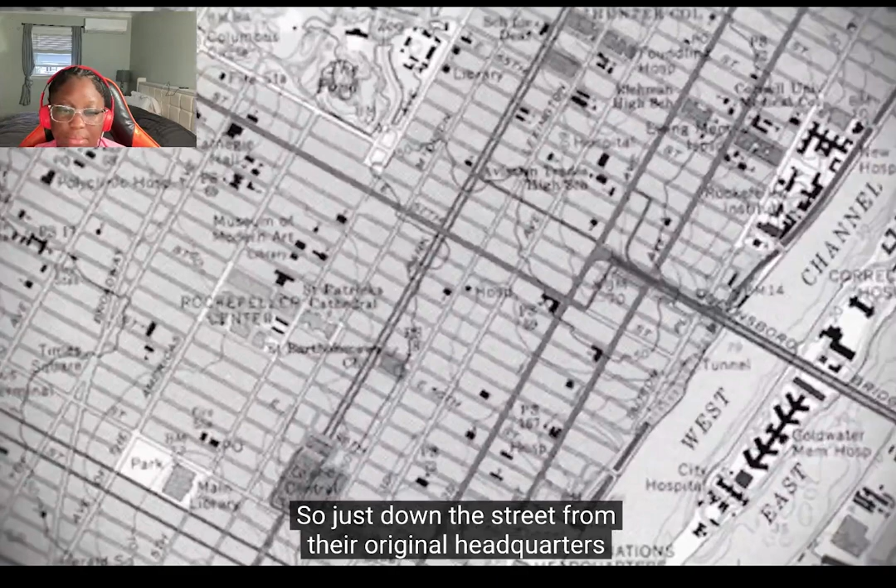So in the 1960s, the financial giant Citicorp was trying to build a new headquarters in Manhattan. Just down the street from their original headquarters was this entire city block, which was up for sale, well, everything except for this church, St. Peter's. Citicorp came to the pastor, Ralph Peterson, and asked, 'What's it going to take for you guys to leave?' And he came back and said, 'We're not leaving. Anything that Citicorp builds has to involve the church as part of it.'

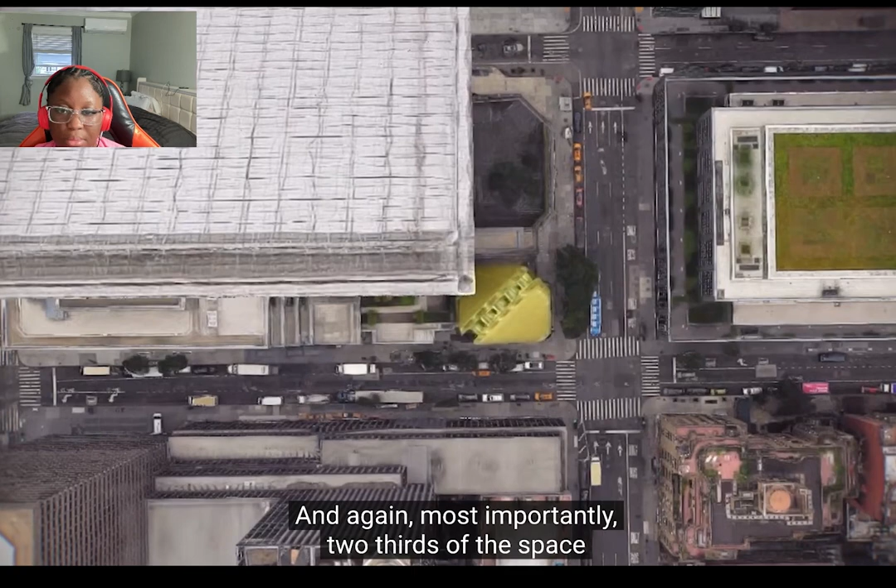What the pastor wanted was for the church to have its own separate identity. So eventually they agreed on two things. One was to replace this old crumbling Gothic church with a brand new one, which you see in front of you. And the second thing was that the church had to be physically distinct from the new tower—completely independent. Most importantly, two-thirds of the space above the church had to be free and clear, had to be open.

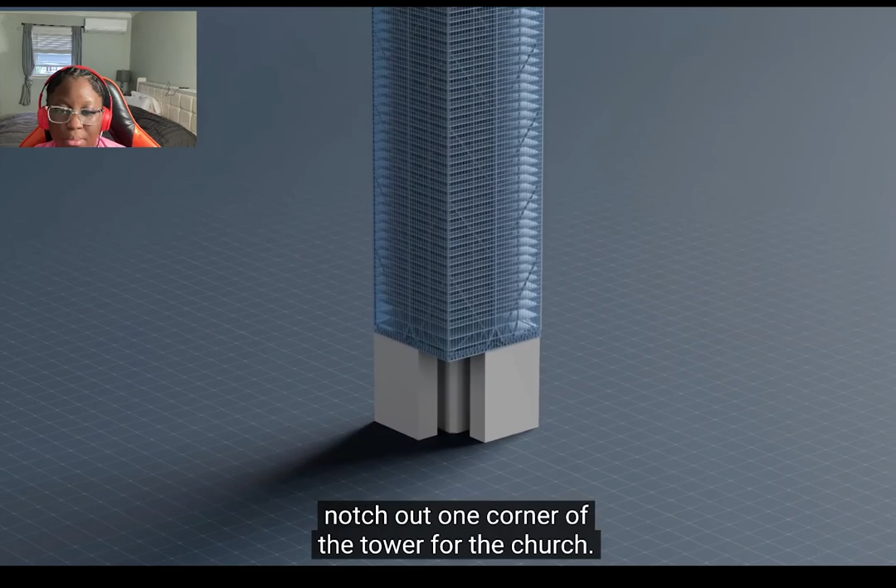Citicorp then hired architect Hugh Stubbins to design the tower and the church, and Bill LeMessurier as the structural engineer. Stubbins explained the constraints they faced: the church needed to be in the exact same spot, and they needed to build the tower around it. If they were to maximize the floor area, they would have to notch out one corner of the tower for the church.

LeMessurier agreed that could work, but why not notch 2, 3, or even all 4 corners, essentially constructing the skyscraper on stilts? So it's probably the first time in history that an engineer has come to an architect and said, 'Let's make our job harder for us.'

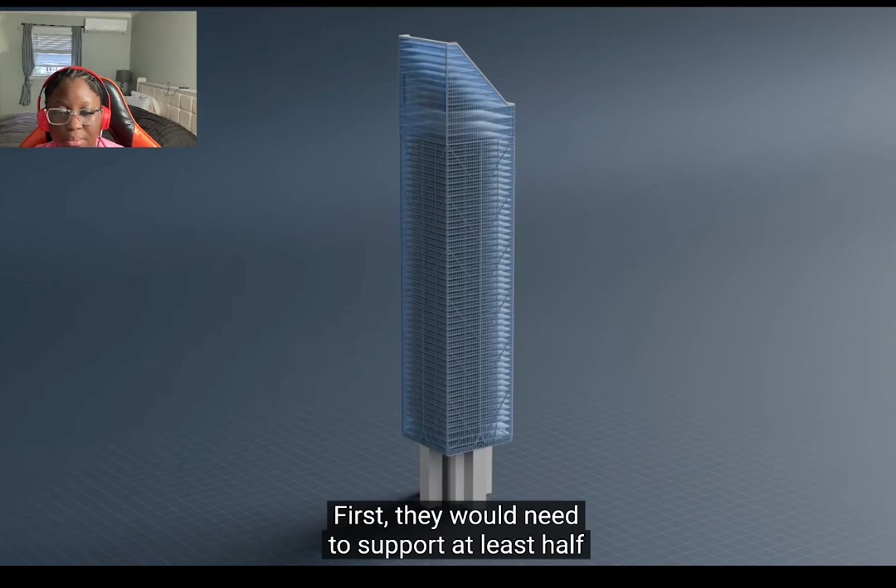The stilts would serve two main purposes. First, they would need to support at least half of the building's gravity load—the rest would be held up by a larger central column. Second, they would need to withstand the load due to high winds.

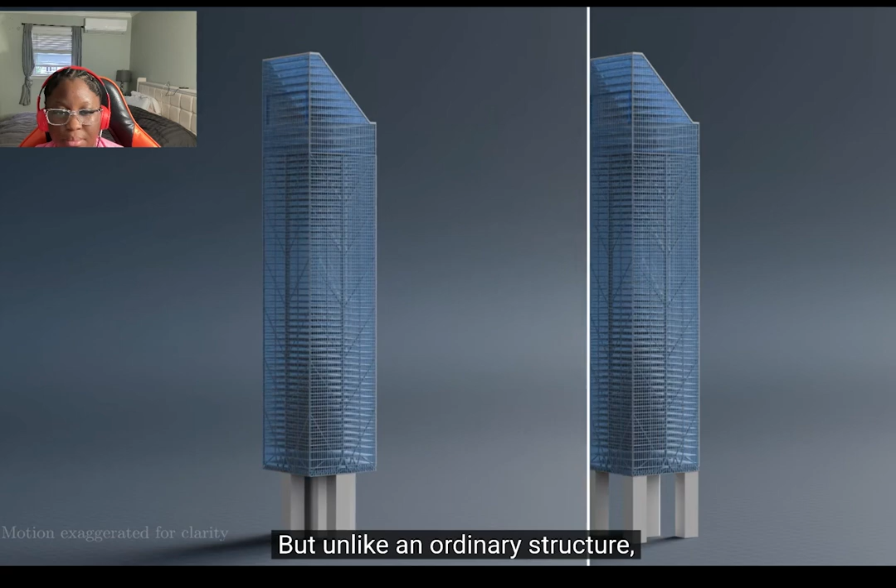But unlike an ordinary structure, the stilts wouldn't be at the corners—they would be at the center of each face. Imagine a chair, and instead of the columns or the supports on each corner of the chair, it's at the midpoint of each side. Obviously, it's not an ideal situation—it doesn't seem very stable. Exactly. So it created an engineering problem.

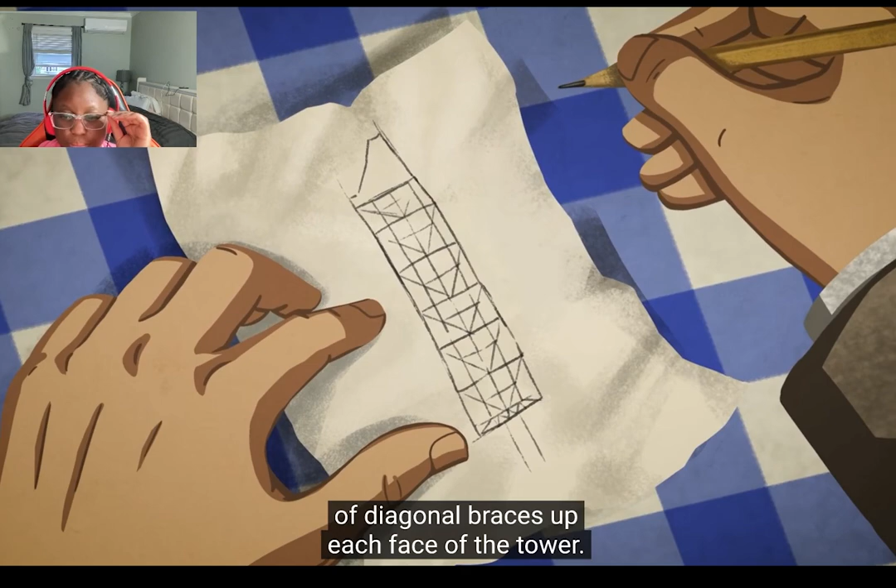As LeMessurier considered the problem, he suddenly had a flash of inspiration. He grabbed a napkin and sketched out an idea: he drew 6 layers of diagonal braces up each face of the tower. These chevrons would transfer the forces to the middle of each face and down to the stilts.

Now we have to see the gravity loads, right? But now here's the trick: the gravity loads are coming down the column. When they get to the brace, they need to find their way into the brace.

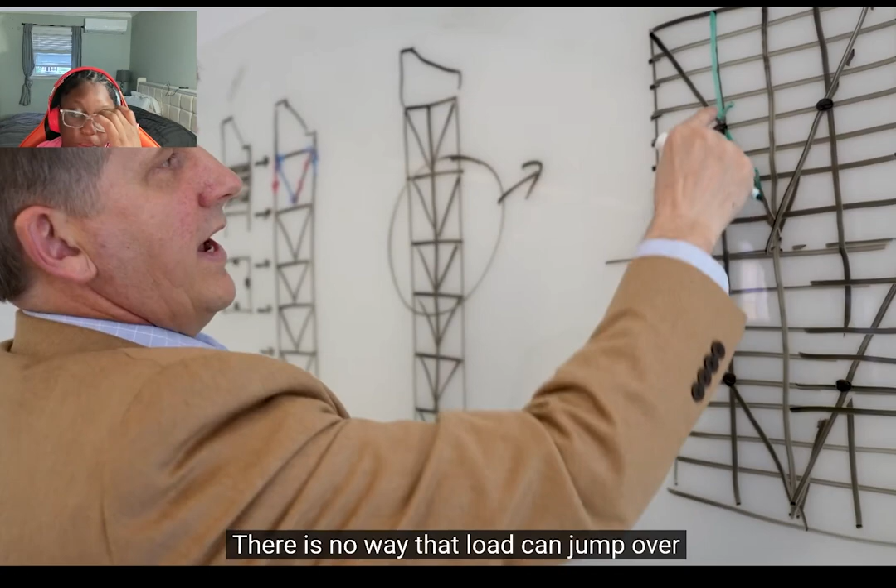So what you do is you take out that column right there. There is no way that load can jump over and go to that column. Now they're coming down into the braces. They get down to the bottom here, and now they continue to go down. You take that column out, and it has nowhere to go except into the brace.

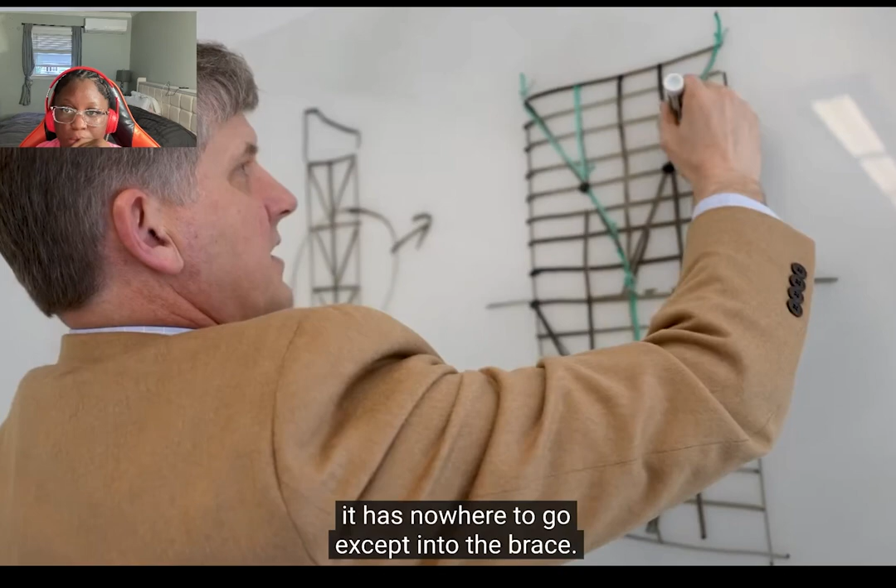By removing the columns at the top and middle of each chevron, every tier acted as a separate unit. They were only connected to the braces and through the central core. So every 8 stories, half of the gravity load would be forced through the chevrons to the mid-face columns, leading down to the stilts.

Can you tell me how big of a new idea was this?

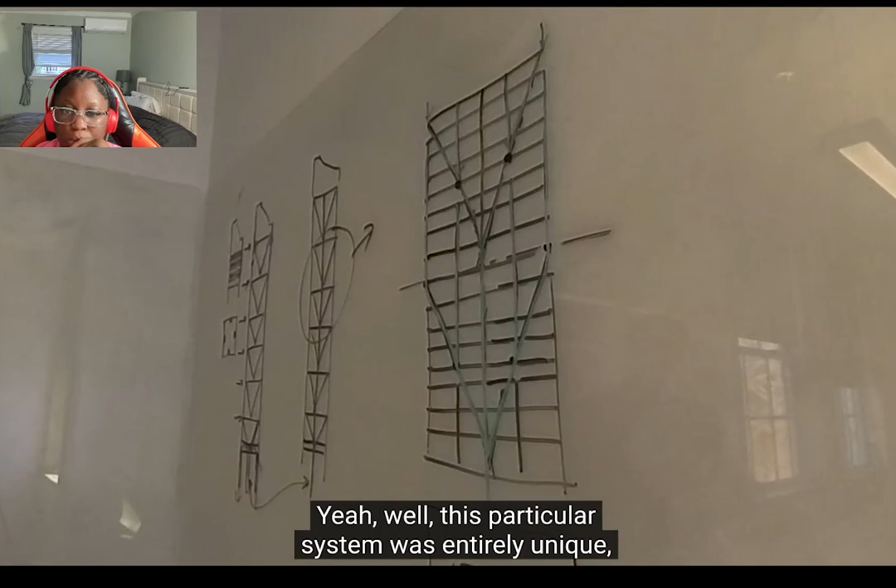Well, this particular system was entirely unique, driven by the placement of the columns, driven by the conditions of the building. Satisfied the chevrons could transfer the gravity load, Lemessurier turned his attention to the second problem, the wind.

When wind hits the left side of a normal building with corner columns, the entire frame deforms like this. So to reduce this deformation, we could strengthen these joints. But there's a better way.

One thing I like about making these reaction videos is I learn so much. So I'm learning and I'm also reacting, doing 2 things at once. A win is a win, baby. A win is a win.

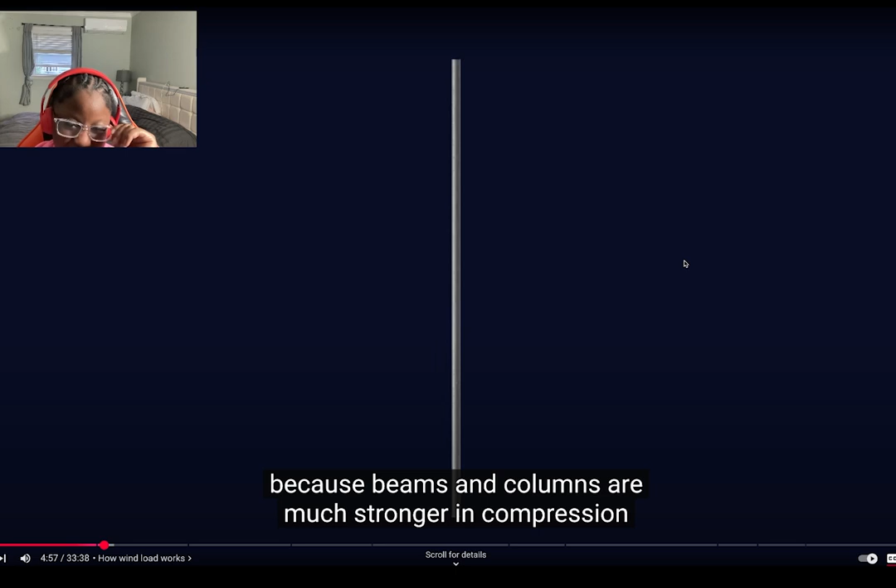Because beams and columns are much stronger in compression or tension than they are with bending loads.

So if we... because I didn't even know that. I didn't know that, and I wouldn't know that if I didn't watch the video.

A win is a win. A win is a win.

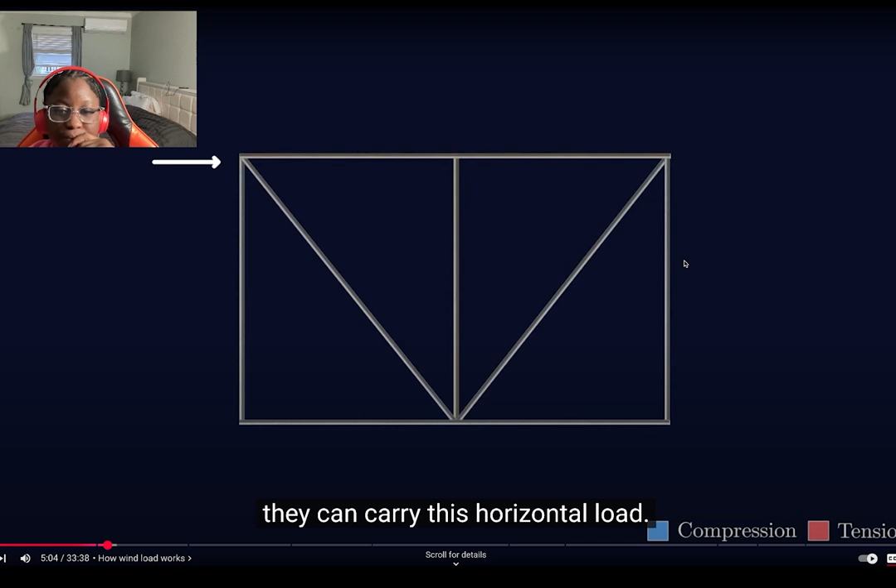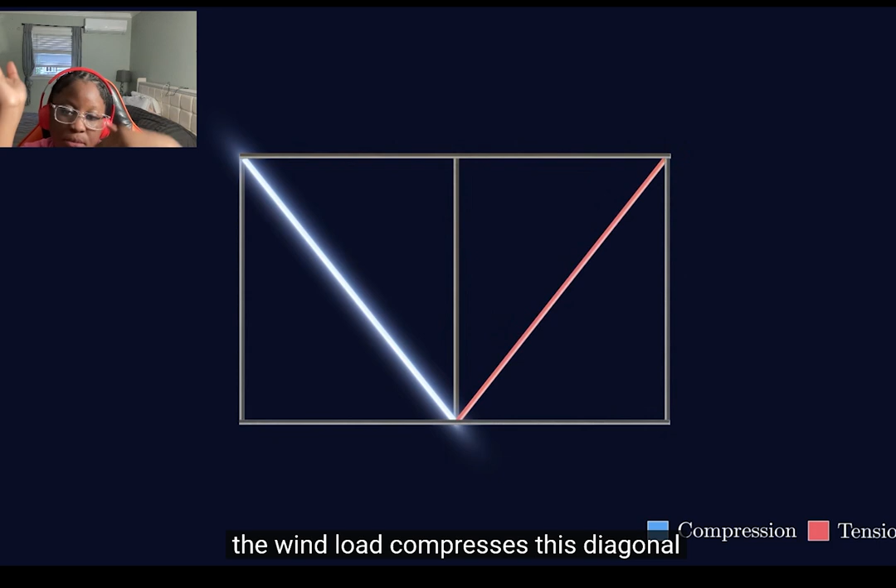Add diagonal bracing, and they can carry this horizontal load. The beams sort of act like springs, and when they're compressed, they push on the joints. When they're stretched, they pull inwards. With braces like these, the wind load compresses this diagonal and stretches this one. The left column pulls down in tension, and the right column pushes up in compression.

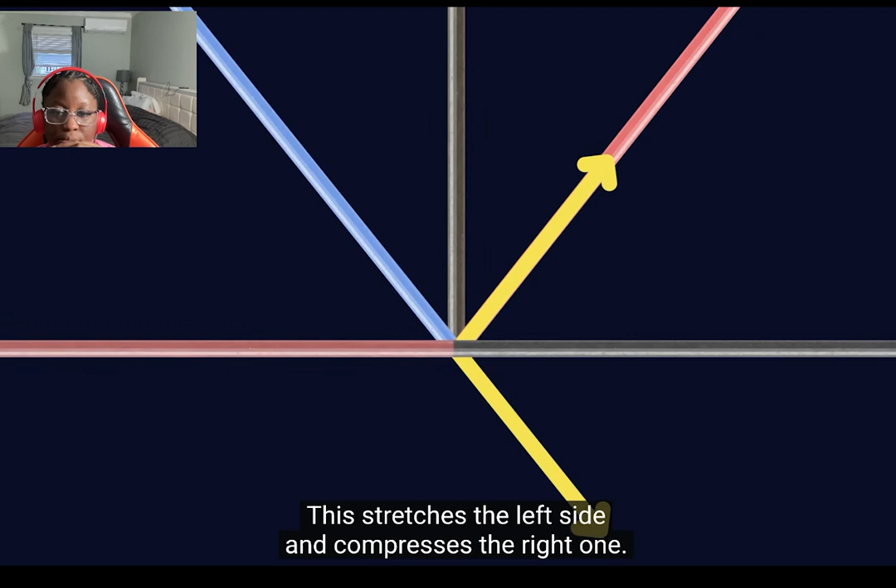Where the braces meet, they both push the bottom beam to the right. This stretches the left side and compresses the right one. But this floor is the top of the next chevron, so this lower section is carrying the force from the layer above it, and the normal wind load from the side.

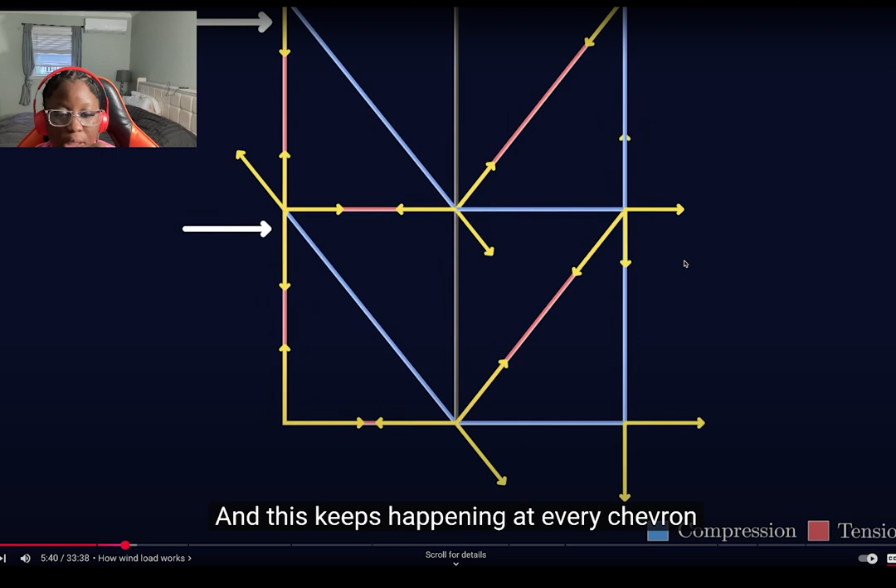That makes sense. This keeps happening at every chevron, so the wind load builds up as you go down the building.

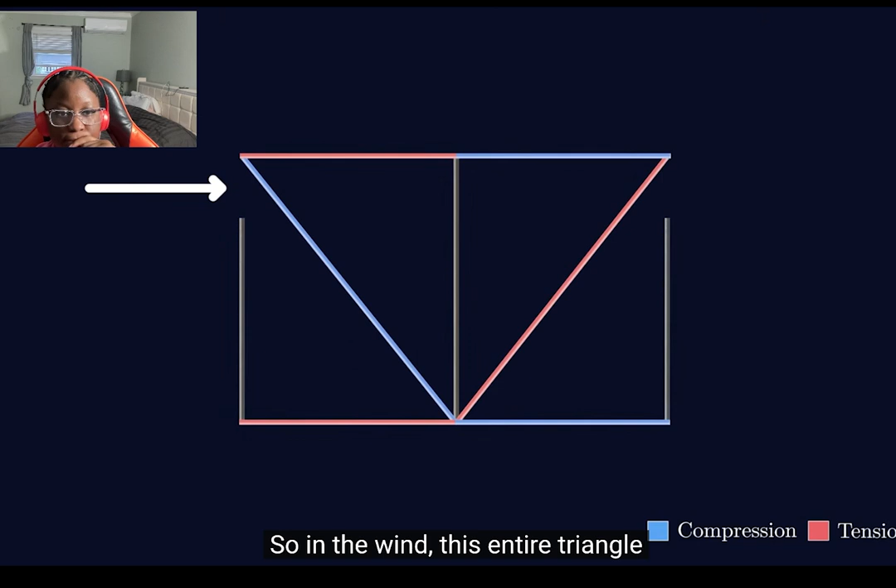But Citicorp can't have corner columns like this because of the gravity load. So in the wind, this entire triangle wants to rotate like this. And to prevent that from happening, this chevron pulls down by going into tension, and the far chevron pushes up in compression. Right, it needs to be in the center.

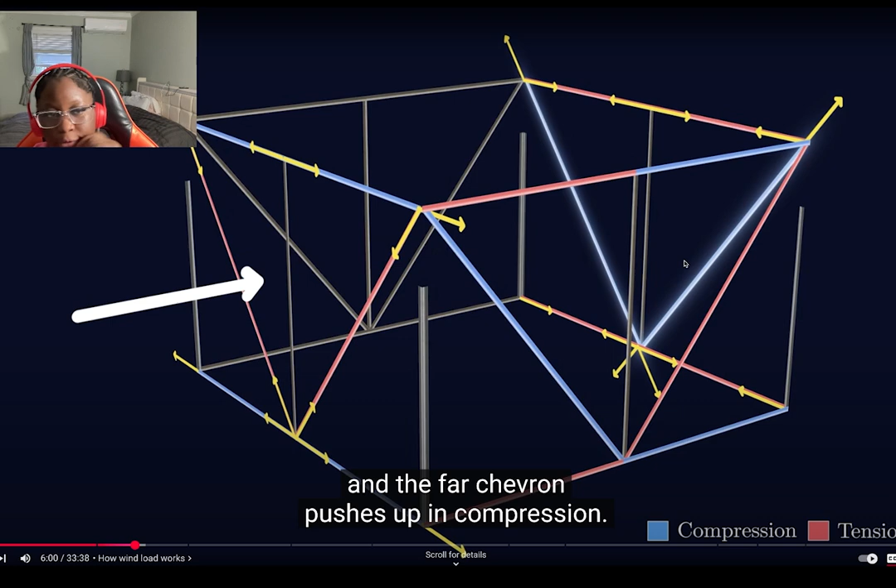So they got to figure out how can they put it in the center and keep it leveled and equal. The top and bottom beams are again forced into compression and tension. The wind load ends up wrapping around the entire building, so every chevron works to transfer the wind load to the section below.

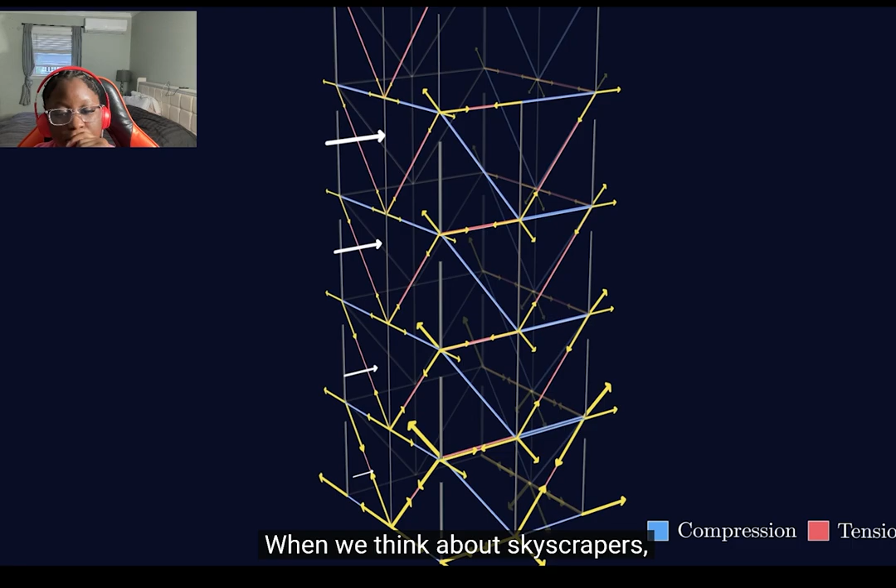When we think about skyscrapers, how big of a deal is wind? If we made a skyscraper here out of all these different things, you push with your phone, you get a certain amount of force. But then you push on my phone as well with a certain amount of force, and your phone is also pushing on my phone. That's the shear in the building, what we call the building shear.

It increases as you go down the building. At the 10th floor, you may have a smaller force than at the 60th floor, but the total force at the 10th floor is like carrying everything above it, so it's much bigger than what's going on at the 60th floor.

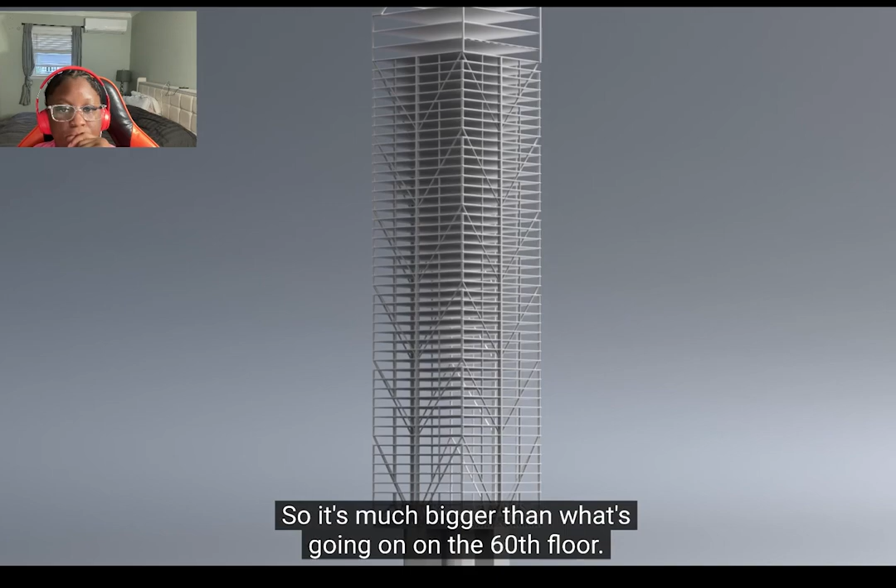So these chevrons were key to LeMessurier's design, but the braces were massive, almost 40 meters long end to end. So even if you could fabricate a steel brace that long, there would be no way to get it through Manhattan. So instead, it was sent in pieces to be welded together on site.

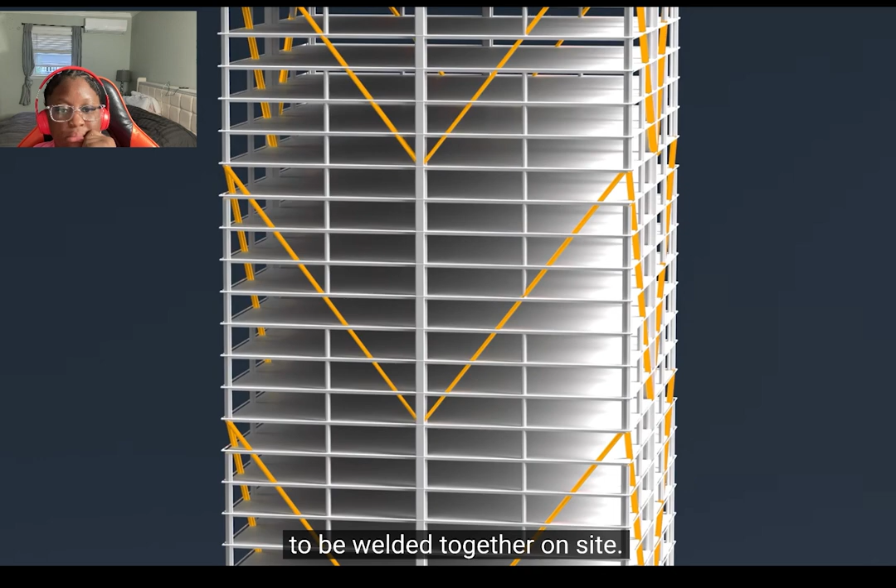The chevron bracing solved the wind and gravity load issues, but it also created a different problem.

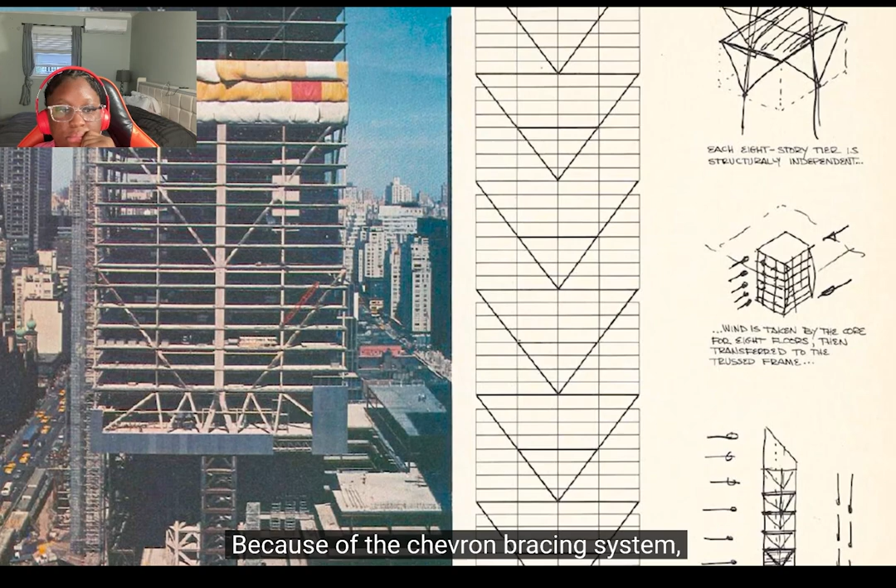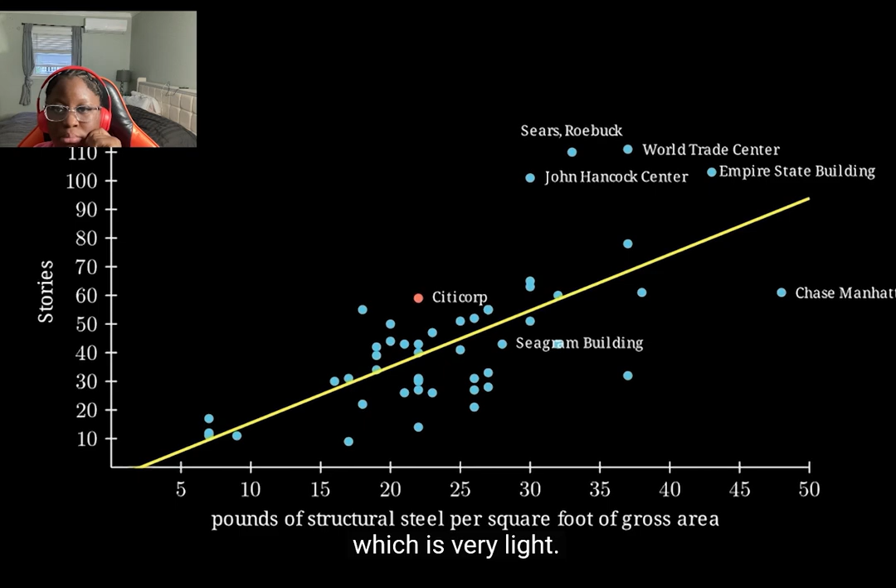Because of the chevron bracing system, they were able to save a lot of money and weight. It was a lighter construct than most other buildings in New York, about 22 pounds a square foot, which is very light. Unfortunately, that made the building swayable, it could move in the wind. That wasn't necessarily a structural problem, it could have just been uncomfortable for the patrons.

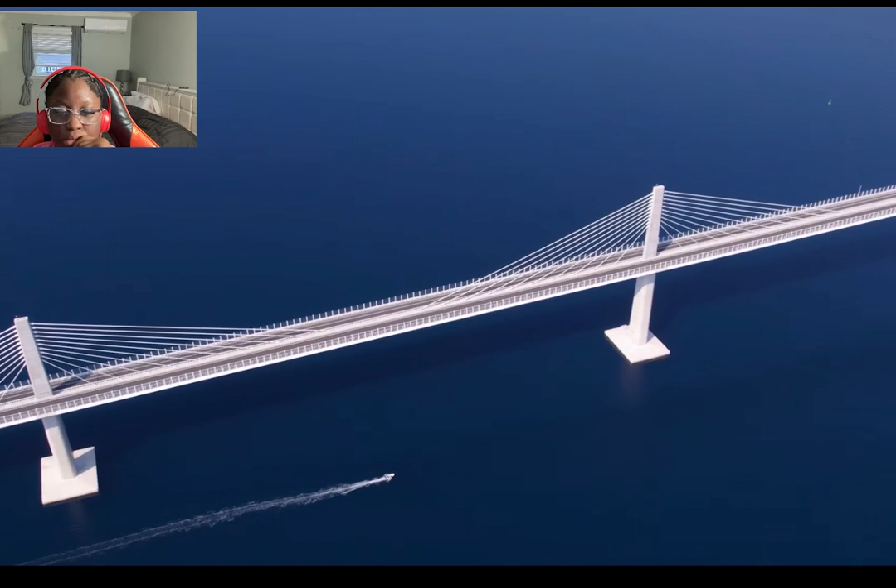One way to solve this was to add more structural steel and make it a lot stiffer. But the solution LeMessurier came up with was far more elegant. He adopted something that had been regularly used in bridges, power lines, and ships, but never before in a building: a tuned mass damper, or TMD.

So we're here at Stark Laboratories, and I'm not with Iron Man, but instead the Columbia Space Initiative, a student team here on campus who has helped us build this incredible tuned mass damper kind of system.

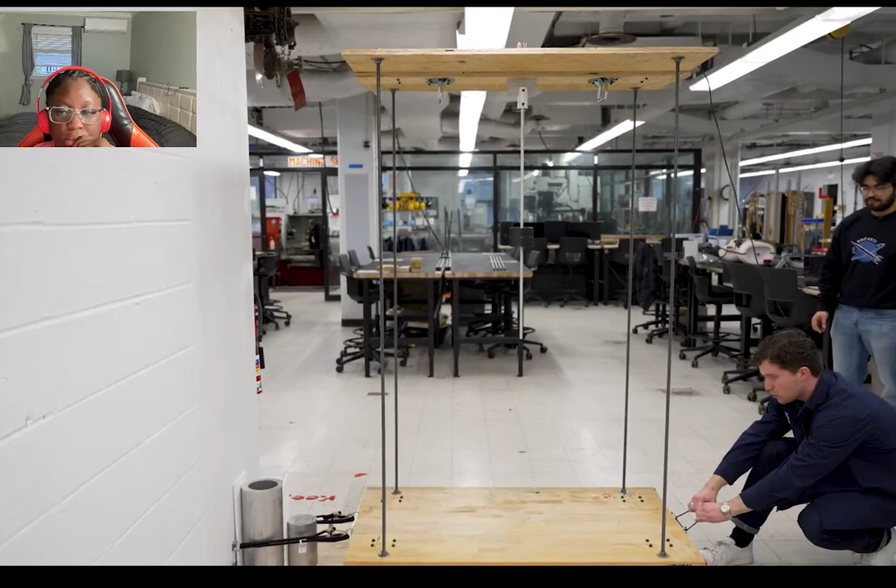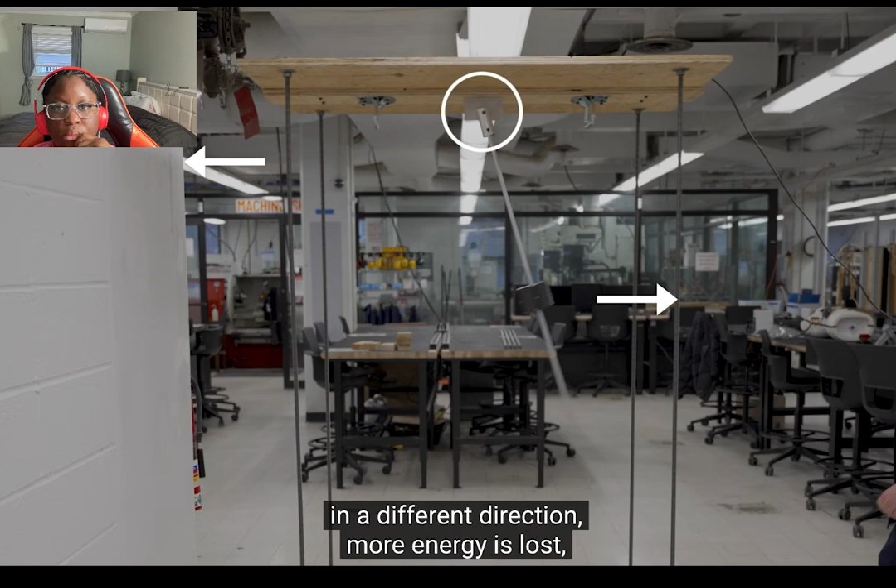We'll use this cart to represent a building. By pulling it back and releasing it, we can excite its resonant frequency. Then we'll put on a little pendulum, an aluminum rod, with a mass at the bottom. As the building sways, it transfers some of its kinetic energy to the pendulum, which starts to swing. Some of its energy is dissipated through friction at the hinge. The pendulum and the building oscillate out of phase from each other, so every time the building pulls the pendulum in a different direction, more energy is lost, significantly damping the sway of the tower.

But this system needs to be carefully tuned so it has the same frequency as the building itself and the right amount of friction. First, the mass needs to be at least 1 to 5% of the building's weight to be effective, and we tune the frequency of the TMD by adjusting the length of the pendulum.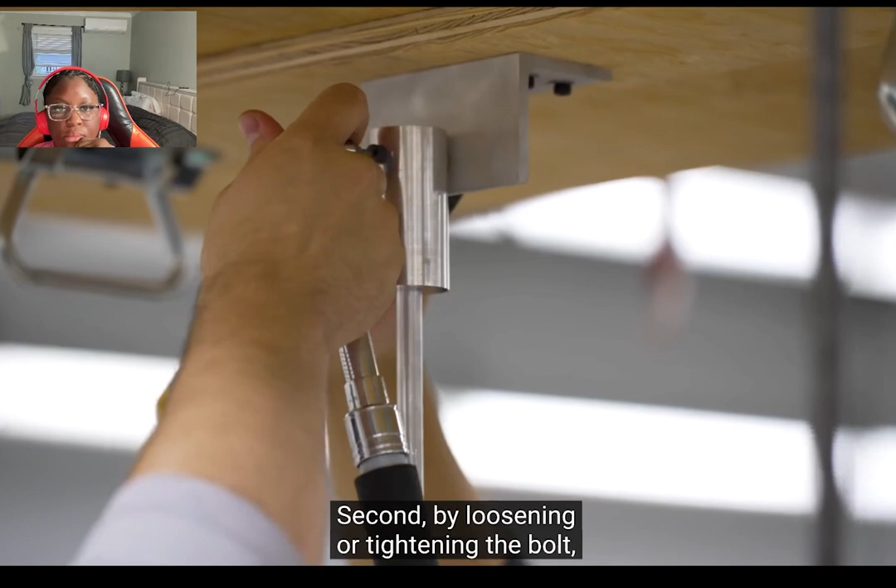I assume engineers do math around this thing, but we're just doing it by feel. By loosening or tightening the bolt, we can tune the amount of damping. We need to dissipate more energy from friction at the hinge to stop the swaying faster, so we just tighten this top bolt to add a little bit more resistance, and we'll see if we can dampen it further.

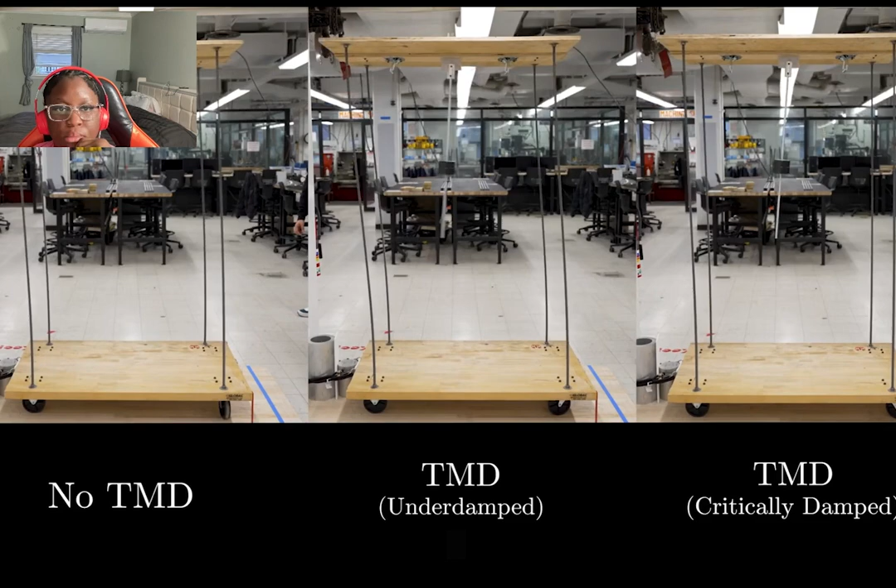Ooh, much different, yeah. That looked great. That was so quick. It is cool when an experiment works.

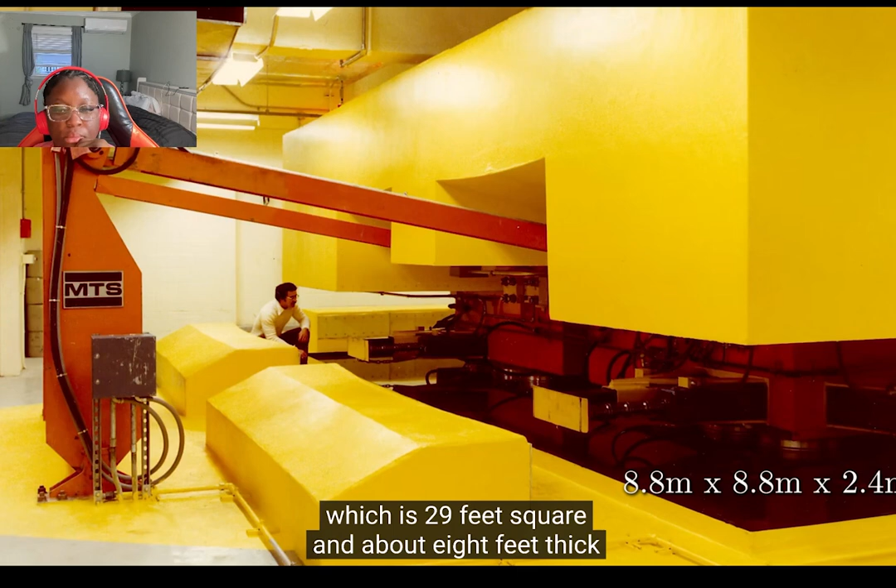It does not always happen. There are many different types of TMDs, like pendulums, liquid columns, and a large mass on springs. LeMessurier used this last one in Citicorp. What you see is a mass of concrete, which is 29 feet square and about 8 feet thick.

Making a building is a lot of work. There's a lot of unspoken work that goes into making a building, and I did not know this until watching this. You know what I'm saying? It's not just like having an idea and putting it down, drawing it on a piece of paper. The constructing of it is really crazy to me, and this is the reason why I think architects are an important part of society. Yeah, it is an important part of society.

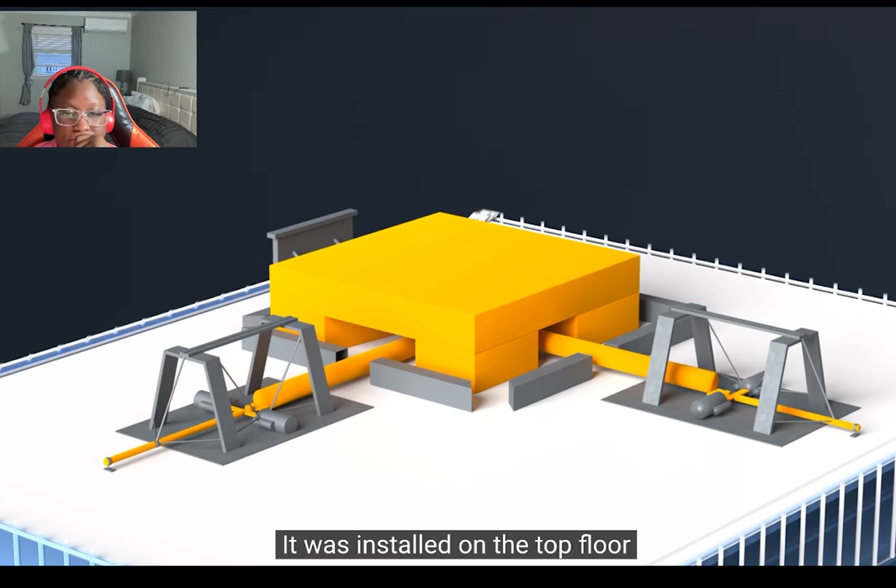Yeah, this is cool, thick and weighs 400 tons. It was installed on the top floor, and it's affectionately known as that great block of cheese. As Citicorp sways to one side, the block starts to move in the same direction. Some energy is dissipated through separate viscous dampers. Citicorp's oscillations are damped through those energy losses as the block oscillates out of phase to the building's motion. LeMessurier expected the damper to reduce the amplitude of swaying by roughly 50%, and he saved around $4 million by not needing an additional 2,800 tons of structural steel.

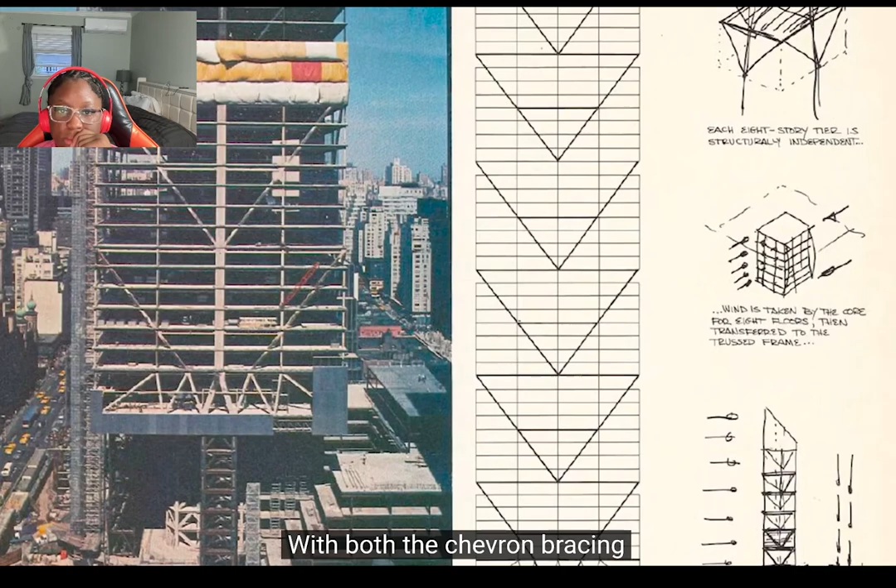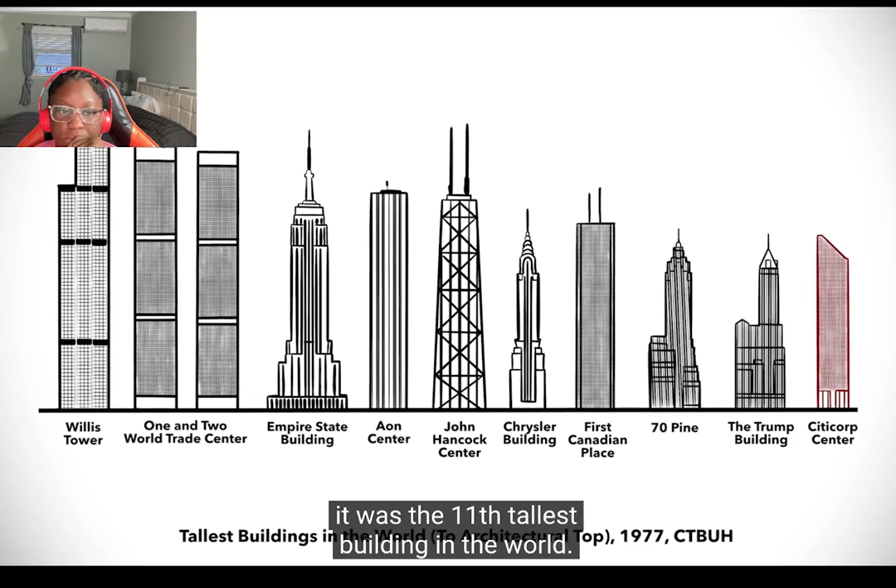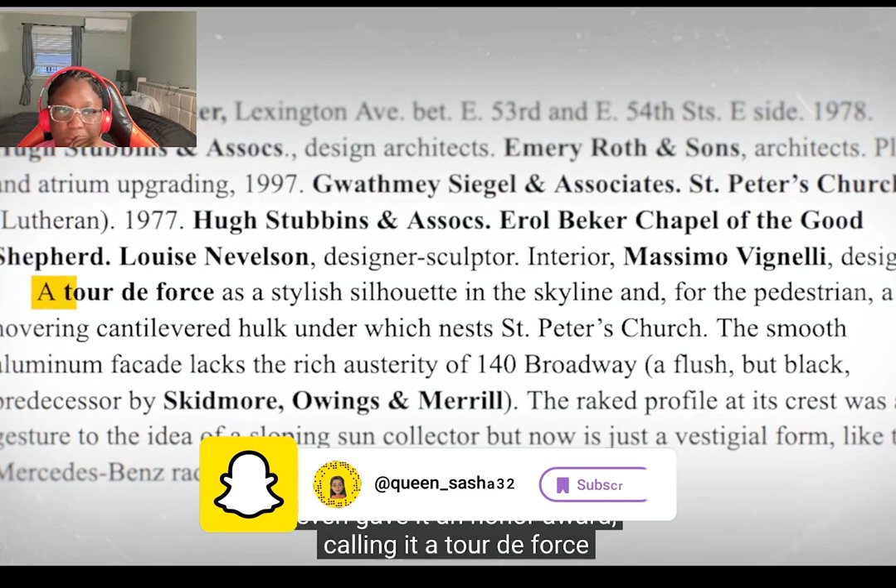With both the chevron bracing to channel forces to the stilts and the tuned mass damper to reduce sway, LeMessurier was convinced the building was structurally sound. On Citicorp Center's opening day in 1977, it was the 11th tallest building in the world. It was described by the press as an acrobatic act of architecture. Later, the American Institute of Architects even gave it an honor award, calling it a tour de force as a stylish silhouette in the skyline, and for the pedestrian, a hovering cantilevered hulk. If only they knew what's about to happen.

If only they knew what was about to happen to this building. So then, it's going swimmingly for years, right? Well, it's going swimmingly for about a year.

But the first hint of trouble came in May 1978. LeMessurier was talking with another client about welding similar chevron braces. The architect and steel fabricator said, tell me, how did those welded braces work out? Seems like overkill, they thought. LeMessurier says, yeah, they were fine. Let me call my guys in New York and I'll check. So he put the call into his office in New York, and they say, oh Bill, didn't you know?

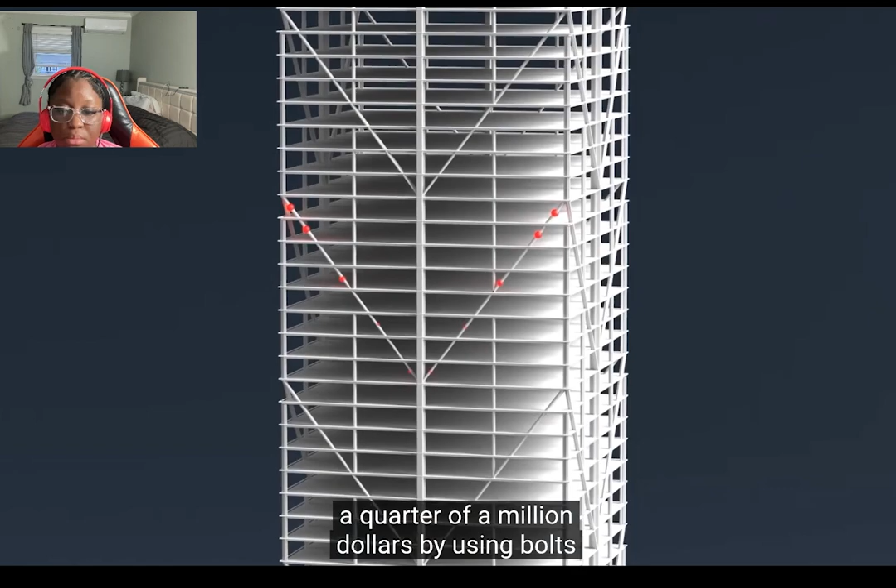We bolted those connections. The contractor had suggested saving $250,000 by using bolts to attach the braces instead of welds, and LeMessurier's firm had agreed.

There is nothing that says a bolt is inherently worse or better than a weld. You use them in different circumstances for different reasons. But it's a little surprising to find out. I thought the connections in this tour de force, one-of-a-kind skyscraper, that's on the cutting edge of structural engineering, was connected one way, but apparently it's connected another way.

But if the braces are going like this, where are they going to go? You only need the weld when the braces are going like this. Since the gravity load was always compressing the braces, some of the chevrons only went into tension under very high winds, and even then, it wasn't a lot of tension. LeMessurier trusted that his team did the right calculations, and the substitution was fine, logical even.

But around a month later, LeMessurier got a phone call from a student who wanted to ask some questions about the Citicorp Center. His teacher had said that engineer didn't know what he's doing, and nobody should put the columns in the middle, they should put them in the corners. That's silly. And I told the student, I said, well, your professor's full of it. He doesn't understand the problem we had to solve.

LeMessurier went through the calculations with the student to reassure him the stilts were in the right place. But the interesting thing is in that moment, he's thinking about wind loads from all directions. Late spring, early summer of 1978, Bill LeMessurier is working on the Back Bay Hilton Hotel that in plan forms a triangle, not a rectangle. Now you got a triangle, what's your orthogonal direction? You just have to give up and say, we're going to analyze it from every direction.

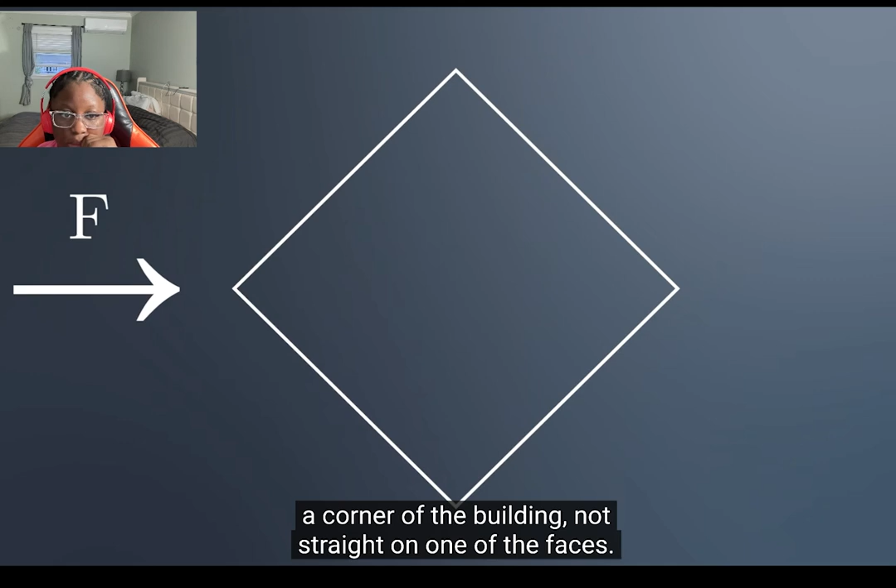He said, you know what? I've been getting all these calls from all these people. I'm going to sit down and explain this thing. He decided to double check what happens to the building if wind is hitting a corner of the building, not straight on one of the faces. These are also known as quartering winds.

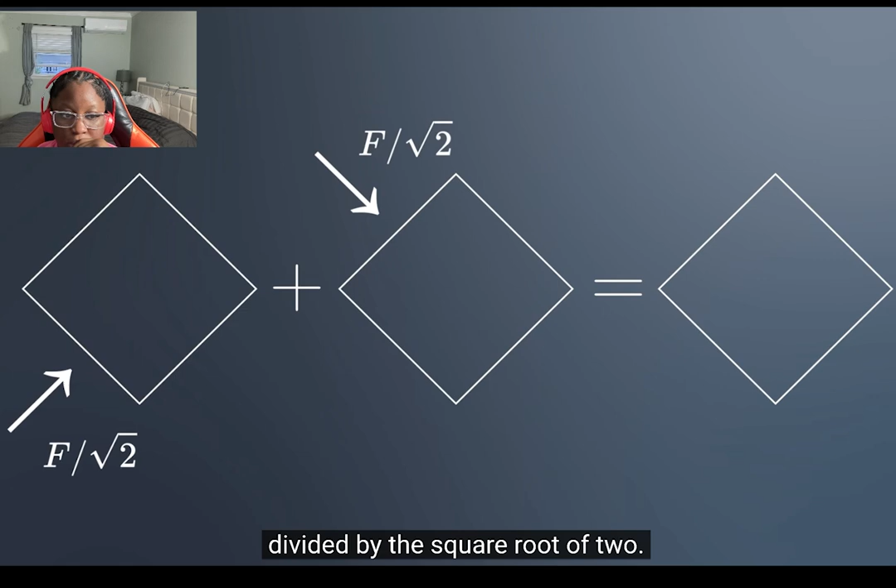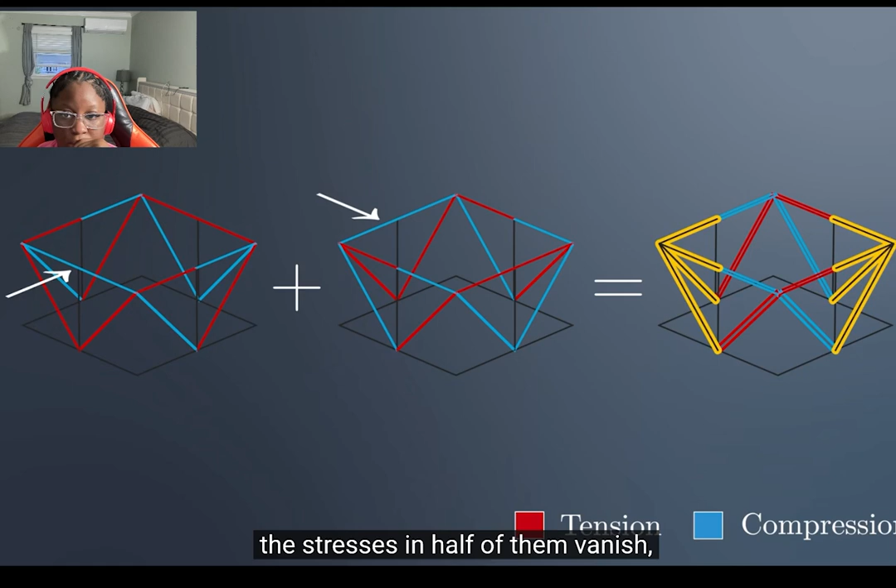So he split the wind into its perpendicular components, so the west side and north side are hit by the force divided by the square root of 2. He computed the forces for each, as we did before, and summed up the result. But then he noticed something strange. And now we look at the diagonals. The stresses in half of them vanish, and in the other half, double. Since the force on each side was F over the square root of 2, these beams get double that.

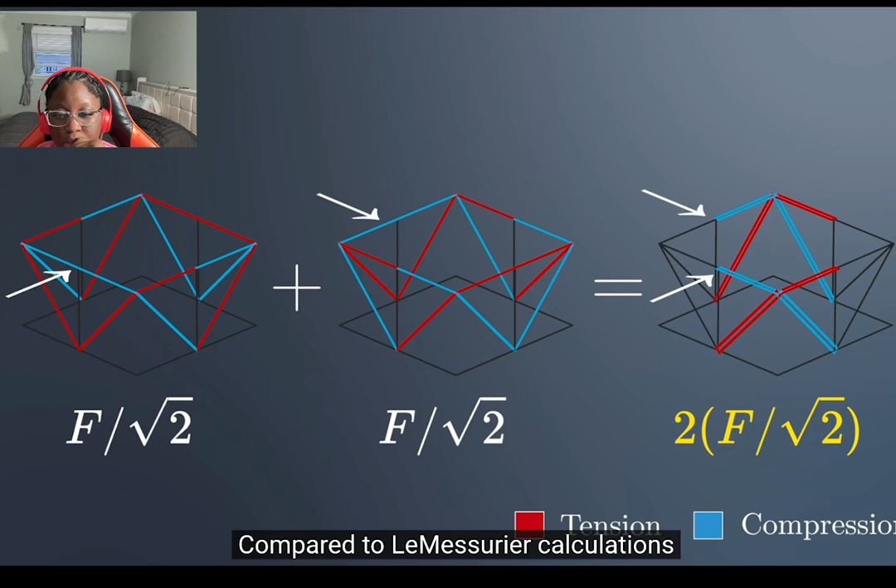Compared to LeMessurier's calculations for the perpendicular wind load, the forces here were 40% higher. So 1.4 by itself is not enough to wreak havoc. Okay, it may be, but it may not be. So then the question is, well, what happens?

This increase in forces wouldn't have mattered in the original design since the chevrons were fully welded together. But that wasn't the case anymore. LeMessurier remembered his earlier phone call. The welds holding the chevrons together were swapped for bolts.

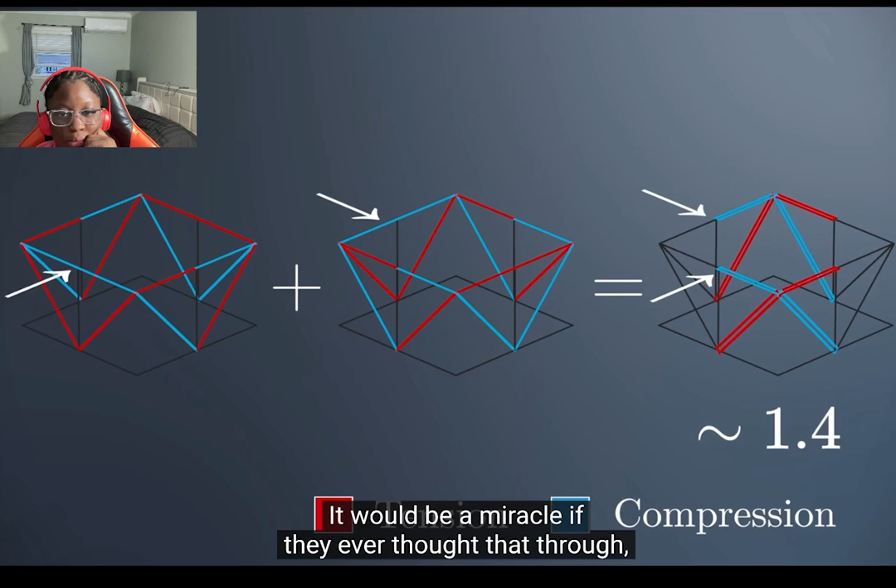How did his team calculate the number of bolts per joint? That's a good question. Please answer that question because I was thinking that too. Did they consider quartering winds? It would be a miracle if they ever thought that through, to think about the diagonal wind. It just wasn't in the nature of anybody.

So I had a bit of a worry. I didn't panic right away, but I decided to go down to New York to my office. LeMessurier requested the building diagrams and pored over all of the connections.

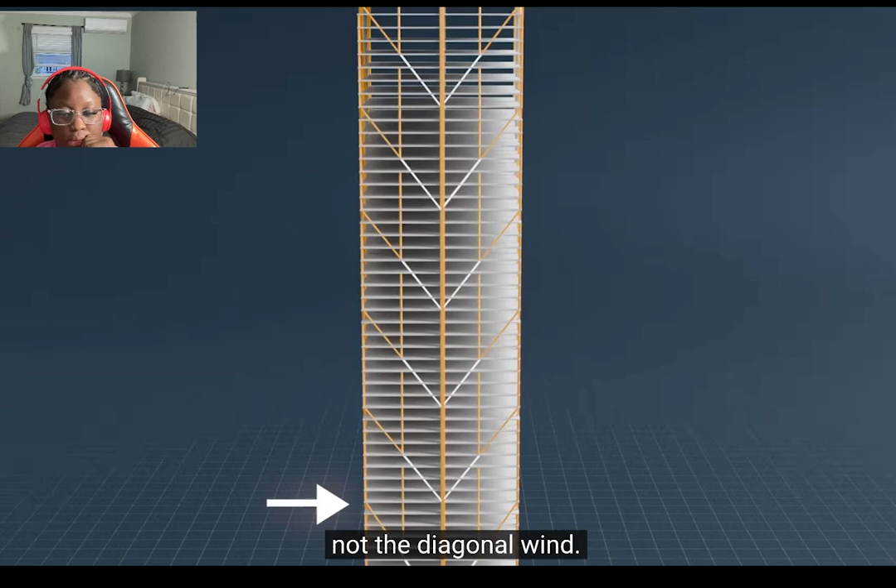He looked at how his firm calculated the number of bolts. There was no question they had taken the straight-on wind, not the diagonal wind. Although wind speed is highest at the top of the tower, the wind shear builds up as you go lower.

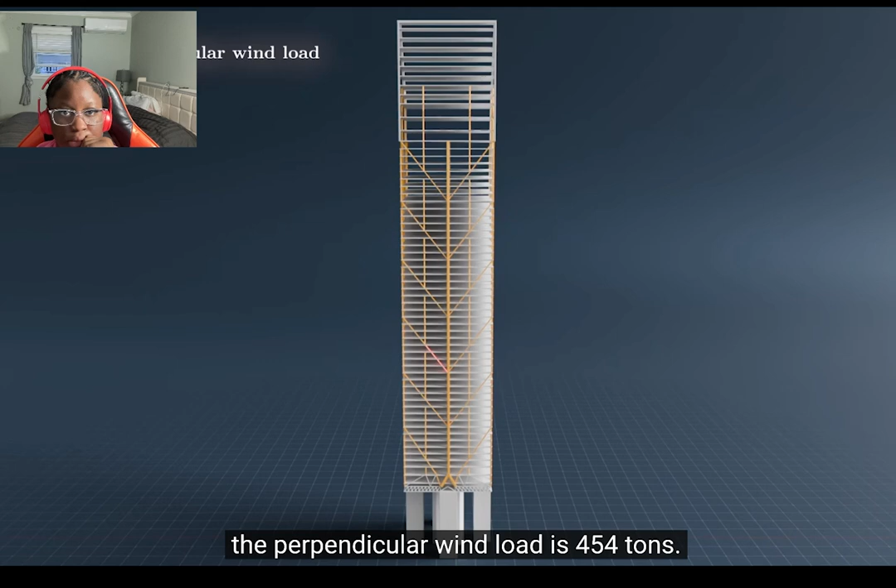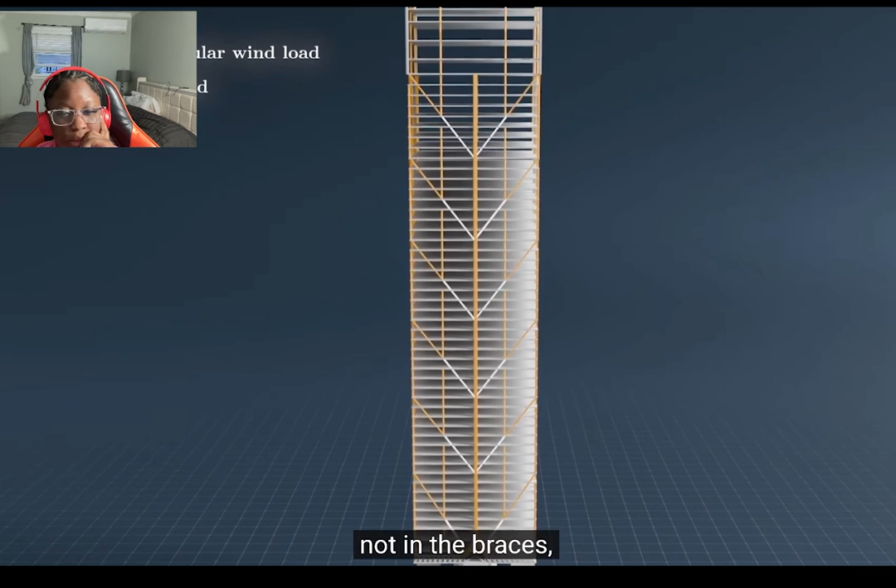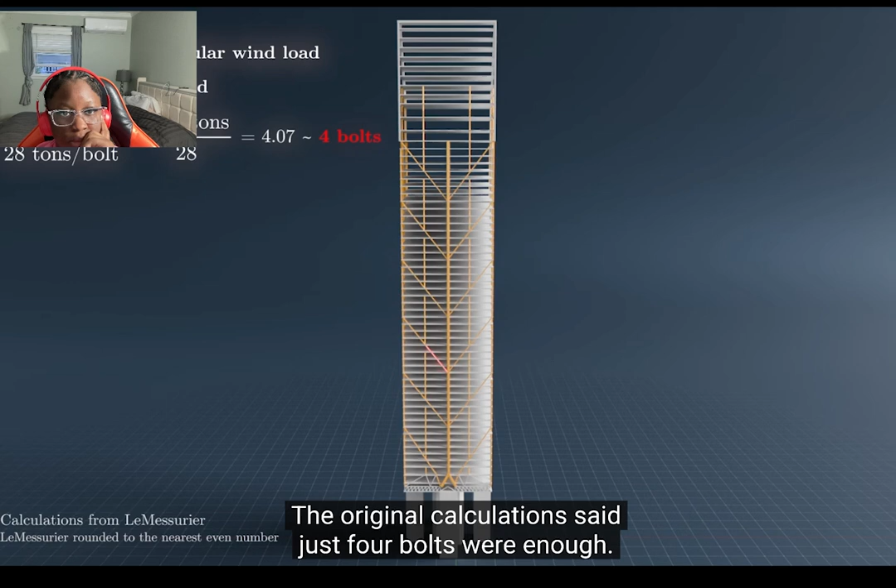Looking at this brace around halfway down the tower, the perpendicular wind load is 454 tons. Because of the skipped columns, all of these braces carry the same gravity load, just 340 tons, from the 8 stories above. The gravity load builds up in the center column, not in the braces, which means there are 114 tons of tension in this brace. If each bolt can withstand around 28 tons, that would require 4 bolts. The original calculations said just 4 bolts were enough, so that was all they used.

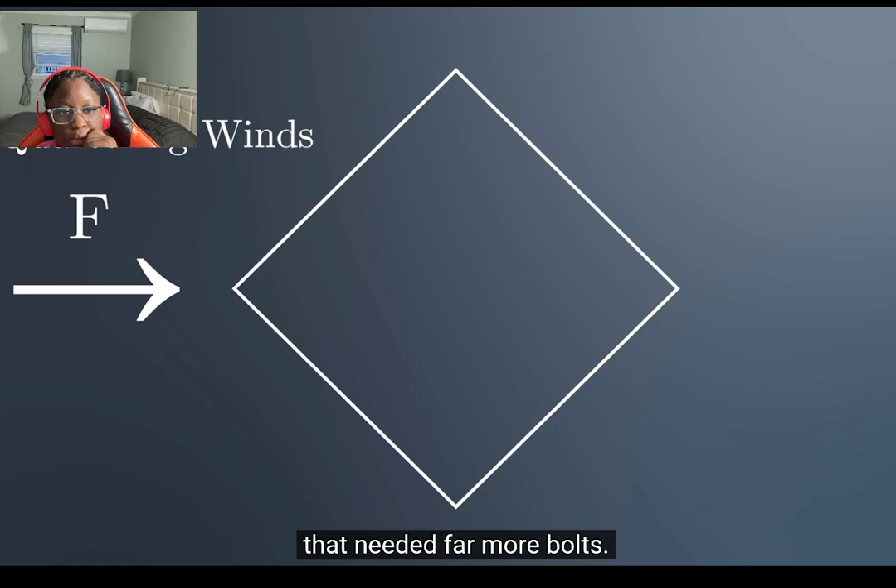But when he added quartering winds, LeMessurier's calculations showed there were some braces that needed far more bolts. At this particular part of the building, which I can show you on my calculations, is right about here. And Bill LeMessurier talked about the 30th floor. I always wondered, why was it the 30th floor?

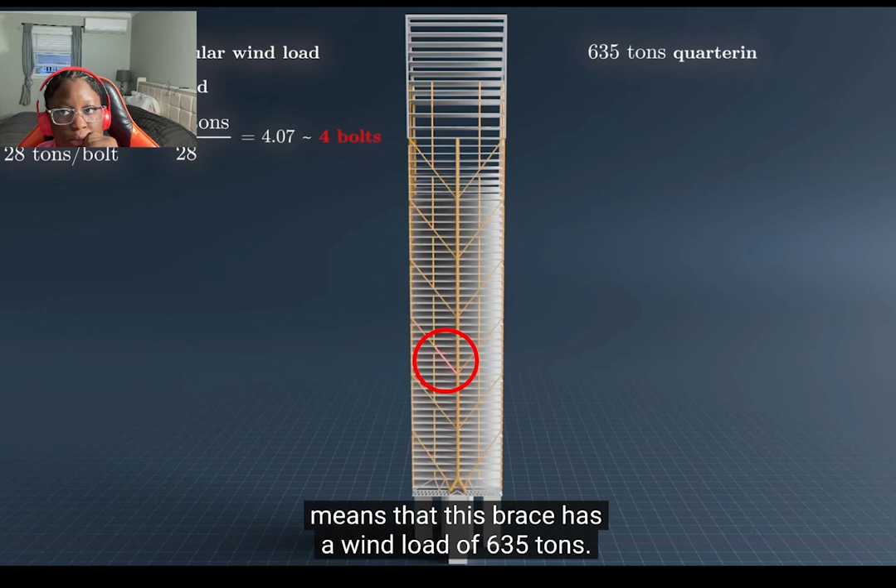The 40% increase from quartering winds means that this brace has a wind load of 635 tons. The tension in the brace is now 295 tons, over double the original calculation. So these braces actually need around 10 bolts, not 4.

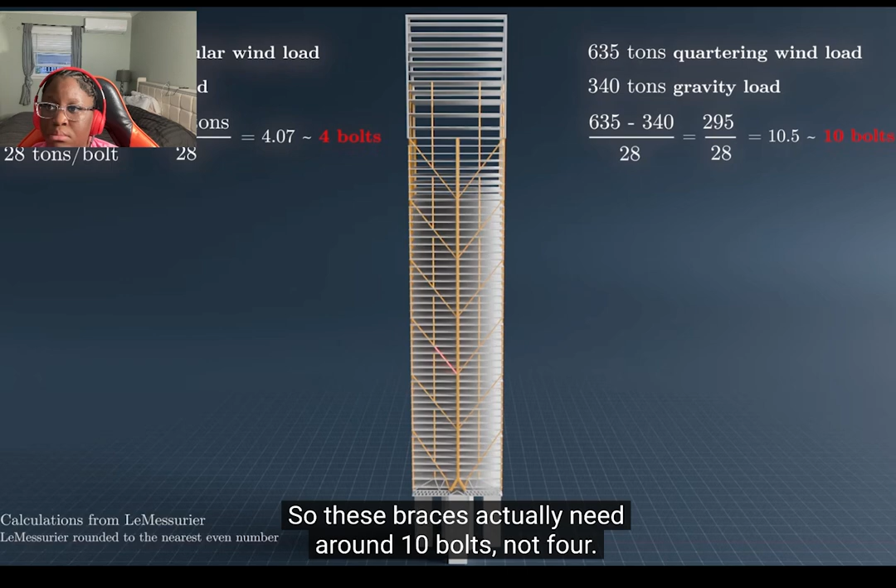But then it turned out they had done something. Damn.

So they need 6 more bolts. I know he had to be stressing. I know he had to be stressing about this.

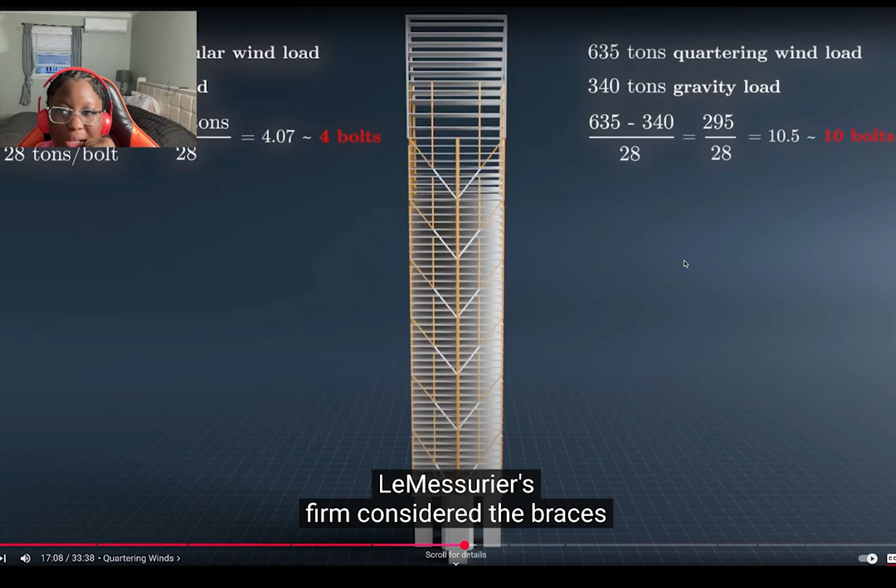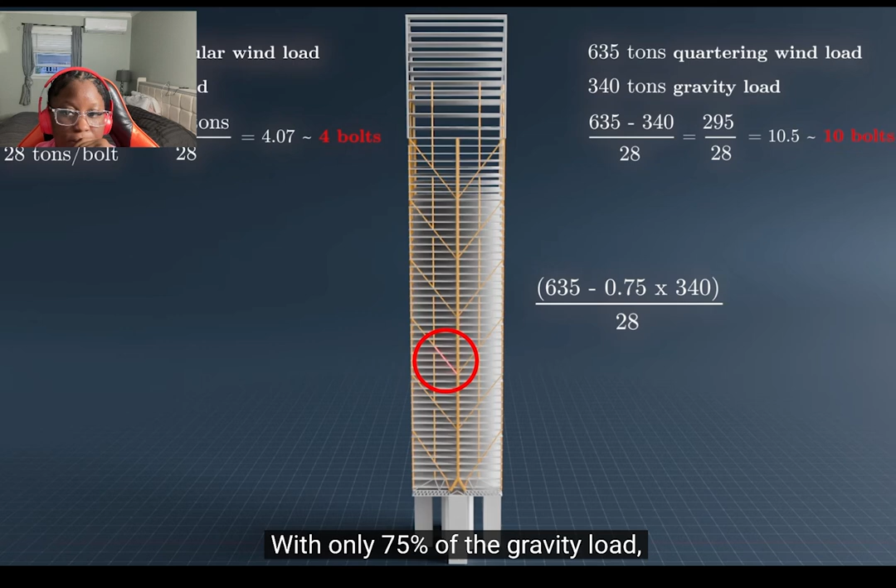LeMessurier's firm considered the braces to be minor structural elements. They didn't use the right factor of safety to calculate the number of bolts. They should have overestimated the tension in the brace by underestimating the gravity load. With only 75% of the gravity load, the tension in the brace is now 380 tons. So they really needed 14 bolts, but they used only 4.

I said, this thing is in real trouble. Imagine what Bill LeMessurier was thinking at that moment. You see that number and you're like, oh my God, this is serious. It's really serious. LeMessurier was starting to panic.

He didn't want to rush to conclusions, so he flew to Canada to check his calculations with Alan Davenport at the Boundary Layer Wind Tunnel. After running more tests, they found that it was even worse than LeMessurier thought.

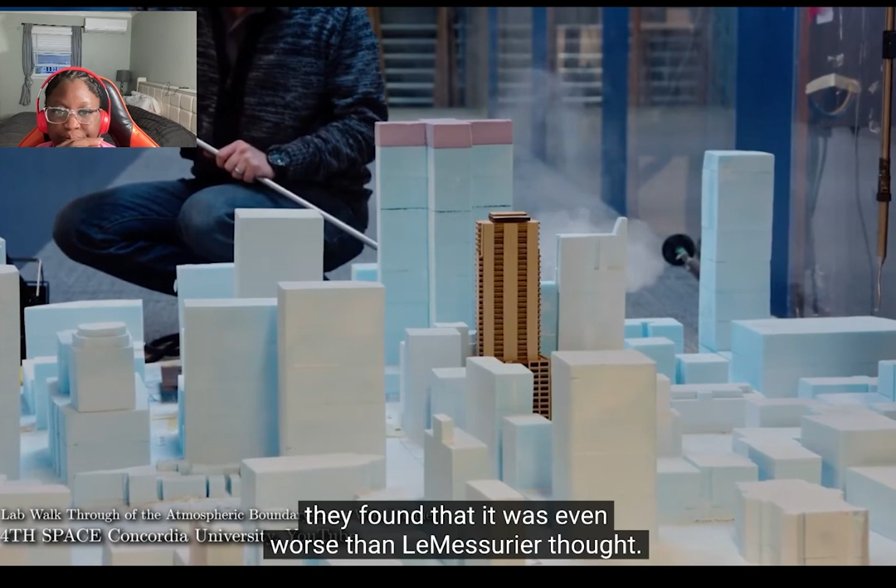That's a job? A wind tunnel? So he's a wind tunneler? Wow. America has so many jobs out there. You just gotta do your research.

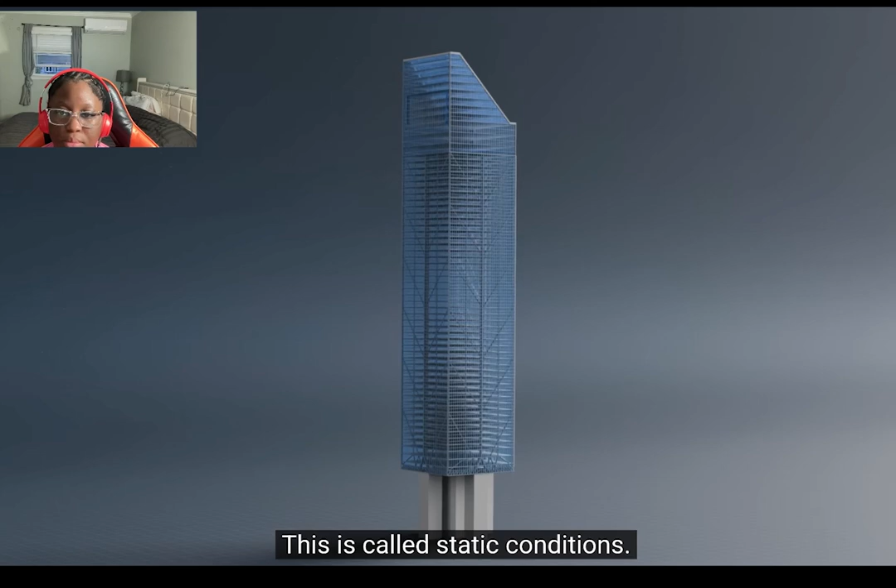The estimated 40% increase in stress was technically correct, but LeMessurier made his calculations assuming the building wasn't moving. This is called static conditions. But the wind tunnel gave LeMessurier a dynamic analysis, how the forces change when the building is moving around. To LeMessurier's horror, the wind tunnel analysis showed that the stresses could increase up to 60% more than originally anticipated.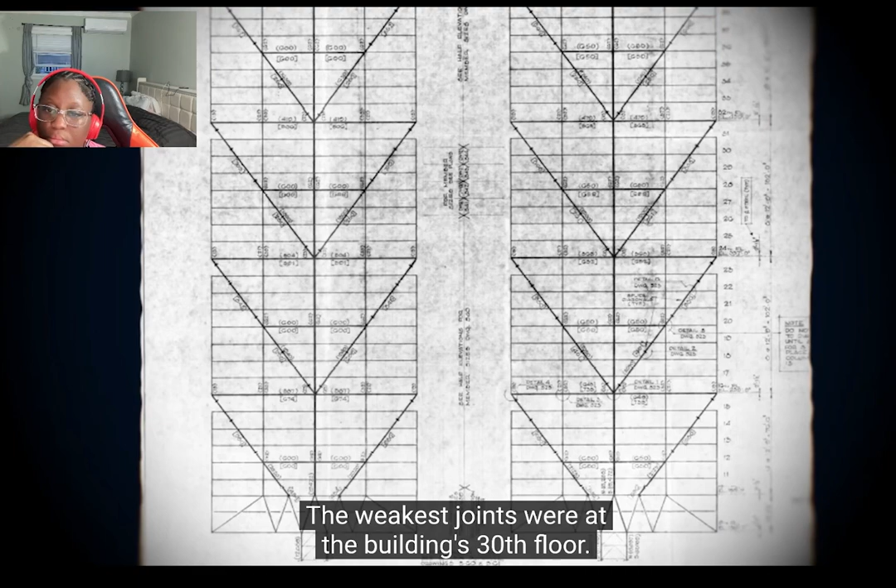LeMessurier squirreled himself away in Maine and worked through the data from the wind tunnel again, joint by joint on every floor. The weakest joints were at the building's 30th floor. If those failed, the entire building would fall. But what were the chances that a storm strong enough to topple the building would pass through New York City? LeMessurier dug through the historical weather reports. On average, a storm strong enough to tear the building apart occurred every 55 years.

But only if the tuned mass damper was working. If a storm knocked out power, then even 110 km/h winds blowing for just 5 minutes would collapse the building. In any given year, the chance of a storm that size happening was 1 in 16. Just 1 year before Citicorp was completed, wind gusts of 110 km/h roared through New York City as Hurricane Belle passed through.

It just must have been truly a moment he never thought he would live through—that building was going to fall down in his lifetime. And since this was July, it could fall down the summer of 1978.

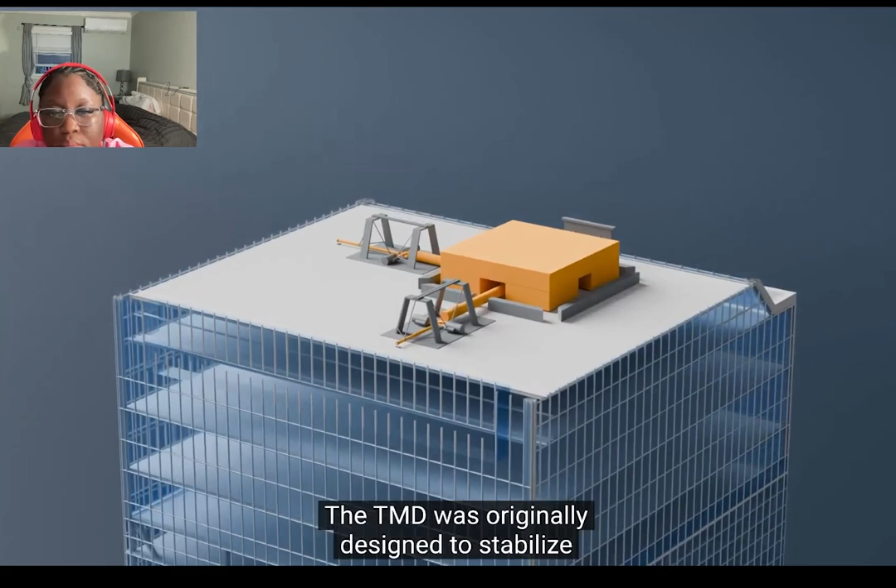But there was a 1 in 16 chance of collapse that very fall. With thousands of lives at risk, there was never any other choice but to act. After speaking to a few lawyers and other engineering experts, LeMessurier told the architect Stubbins, and together they informed Citicorp's chairman, Walter Wriston. Within hours of that meeting, LeMessurier acquired emergency generators for the tuned mass damper. The TMD was originally designed to stabilize any swaying for comfort, but now it became the crutch that the tower leaned on. LeMessurier pinned all his hopes on it.

He called the confidential repair plan Project Pandora, but that sounded ominous, so he came up with the Special Engineering Review of Events Nobody Envisioned, or Project Serene for short.

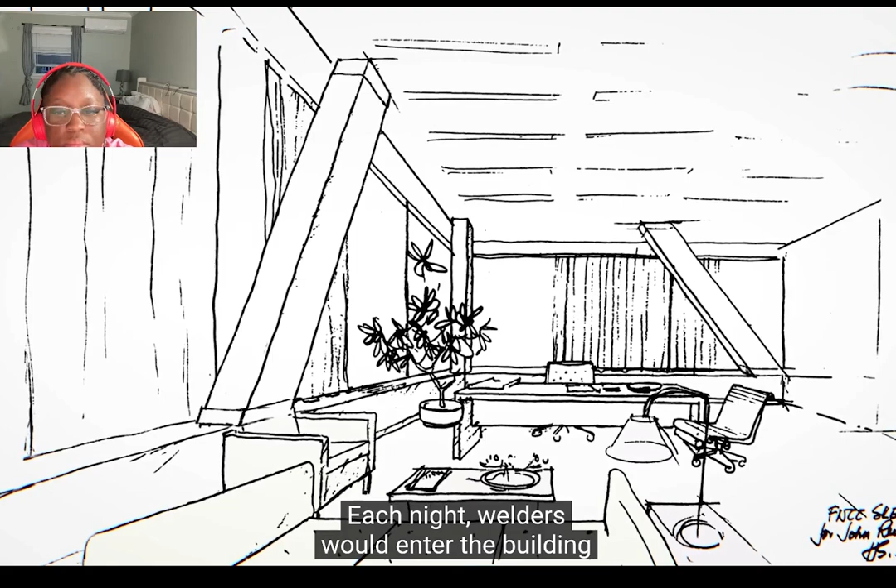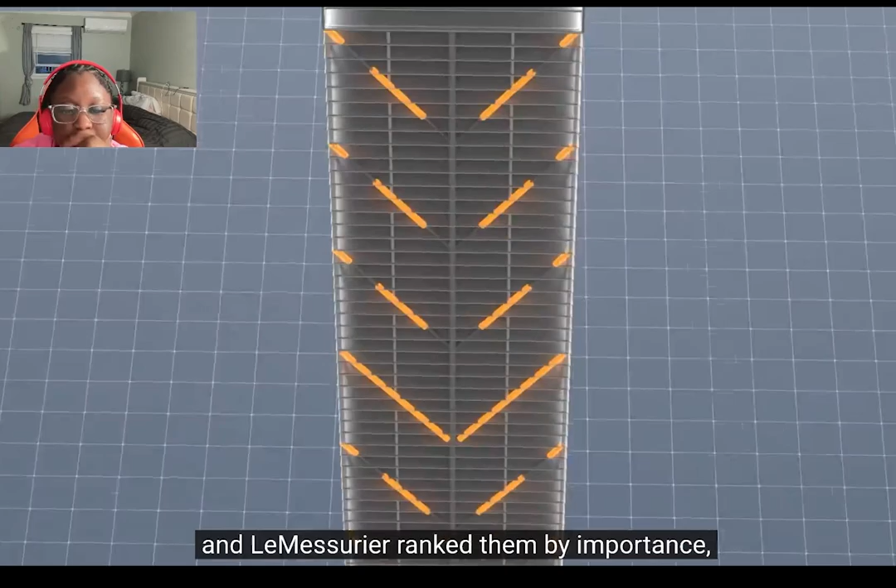Each night, welders would enter the building after everyone left, rip off the sheetrock around the chevron beams, and weld two 5-centimeter thick, 2-meter long steel plates on each joint—like Band-Aids, literally Band-Aids on both sides of these joints. After, they'd replace the wall and clean everything up before the office workers came back the next morning. They needed to weld over 200 joints, and LeMessurier ranked them by importance, starting with the ones on the 30th floor.

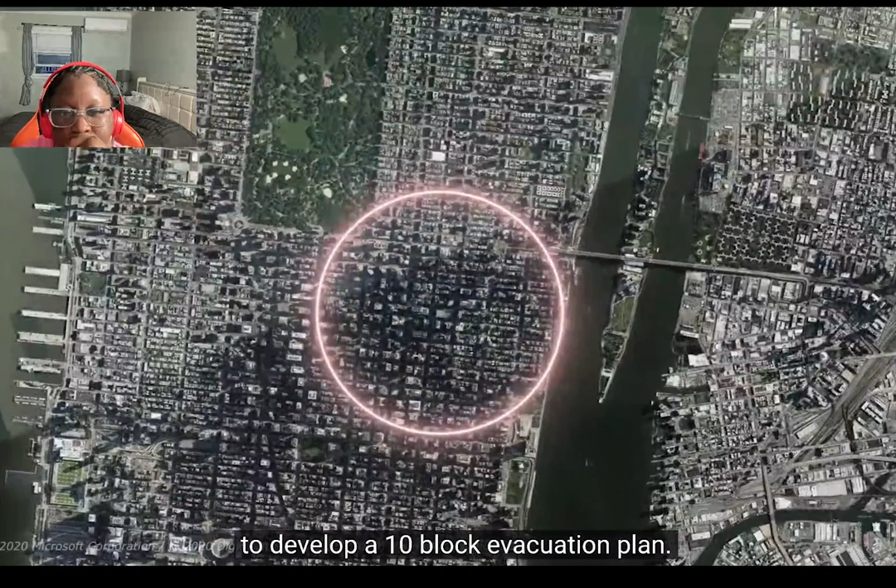But the repairs wouldn't be completed before hurricane season, so Citicorp worked with the Red Cross to develop a 10-block evacuation plan—how many people were at risk in the building, and if it fell, would it affect other buildings? Were there chances of it leading to something more disastrous?

Absolutely. This would have toppled, and it would have toppled into another building, which would have toppled into another building. So it just would have been a huge domino effect going on in Manhattan if this was to collapse. That's crazy to me. That is crazy to me.

At least, I'm gonna give it to him though—at least he decided to move forward and try to fix it. Because he could have went the coward way and just, like you said, probably drove into a bridge and just ended it all and let somebody else deal with it. But he sat there and said, you know what, this is my building, I have to fix this building, I have to fix this problem, and he did it. So kudos to that guy. I'm gonna give you some snaps for that one. That's what you call a man. Man for act like man. Man for turn up like man. Man for behave like man. Man for work like man.

You know, which would have continued a horrific process, so it was untold what the ultimate effects could have been. I mean, just the evacuation plans—how many people? Thousands. The building itself housed thousands, and then the residents and businesses surrounding the building, it was into the thousands.

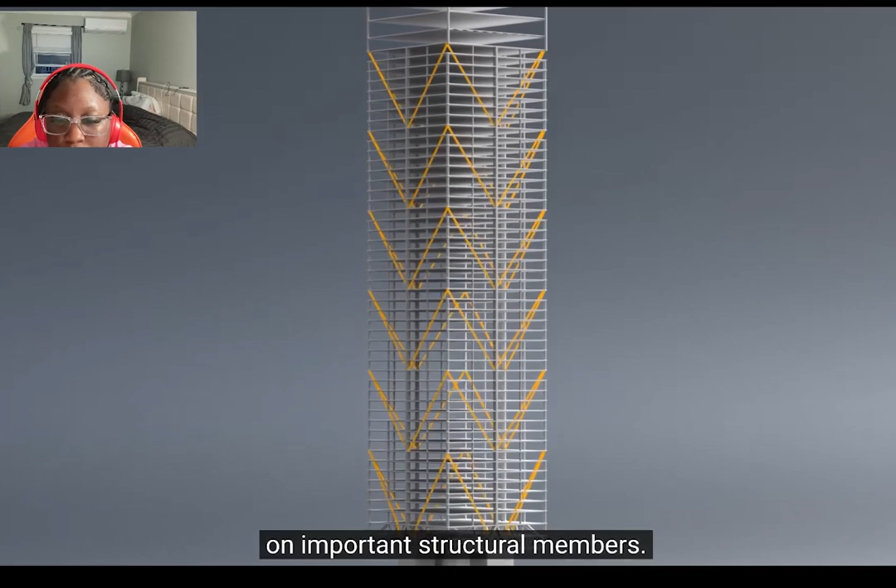Despite the risk, they decided not to tell the public, or even the office workers in the building. No one wanted a mass panic. Instead, they fitted strain gauges on important structural members. The gauges monitored the skyscraper's every bend and twist from a comm center 8 blocks away—at least that would give them a little bit of warning. But this plan required new telephone lines, and the phone company wouldn't get around to doing this for months. So Citicorp's chairman immediately called AT&T's president, and the lines were installed the next morning.

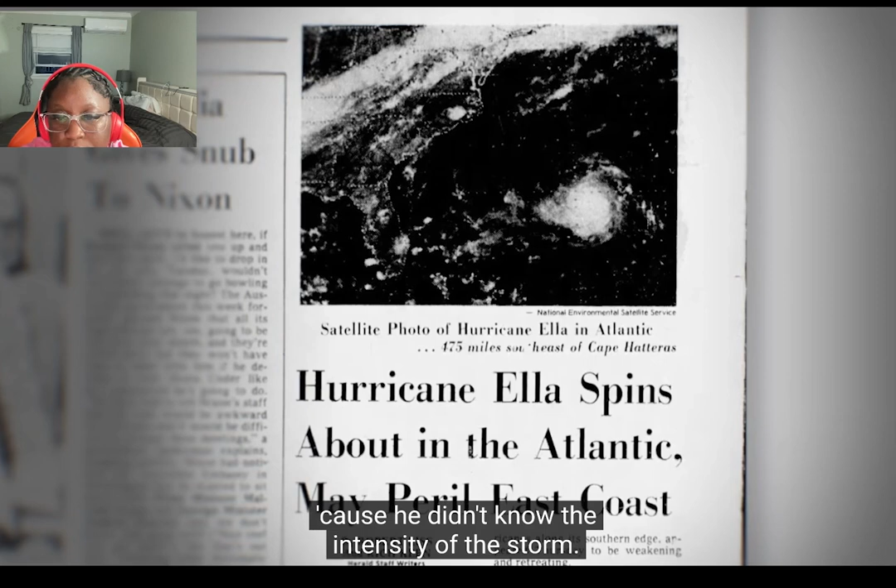Hurricane Ella starts brewing in the Caribbean, and this is the one storm that they're nervous about. The repairs were halfway done by now. I think it was a 1 in 200 year storm that it could withstand, but LeMessurier wasn't taking chances because he didn't know the intensity of the storm, and this was a strong storm. So there was a chance, and they had to prepare for that chance.

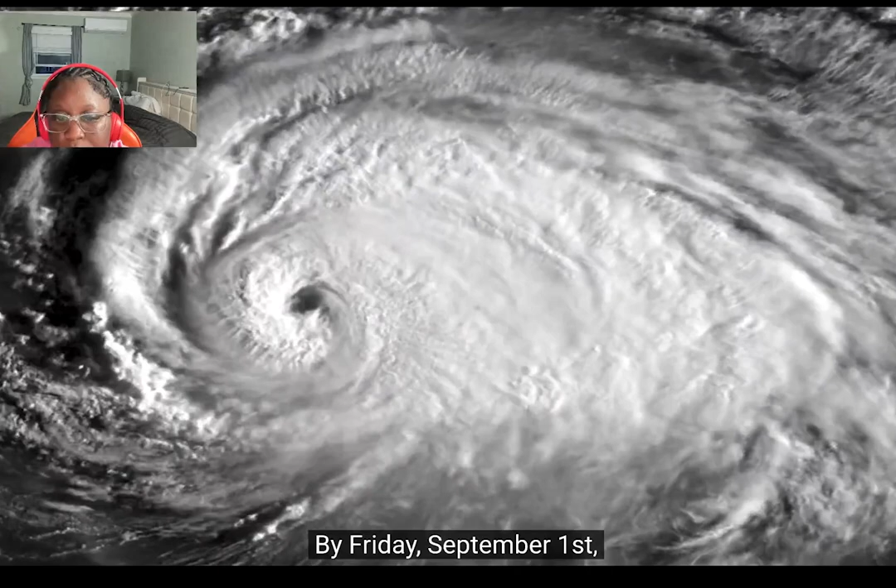By Friday, September 1st, Ella was making her way toward New York with winds reaching 200 kilometers per hour. City officials braced to start the evacuation. Police would go door to door to get everyone out within a 10-block radius.

For 24 tense hours, Ella stalled around North Carolina. Like LeMessurier said, we were sweating blood. But sometime in the night, Hurricane Ella veered off into the sea at the last minute. It intensified and hit Canada with peak winds of 225 kilometers per hour. But Citicorp was safe.

LeMessurier described that next morning in New York as the most beautiful day that the world's ever seen. They completed the repairs in October.

Honestly though, who can you... what can you say about that? That's not God, bro. Come on, that's not God. That's not God coming through and helping him out. Like, who can you blame for that? Just what, the higher beings? Mother Earth? Like, come on, bro. That's God. That's G-O-D. That is God. That is Jesus' daddy. That is Jesus' daddy.

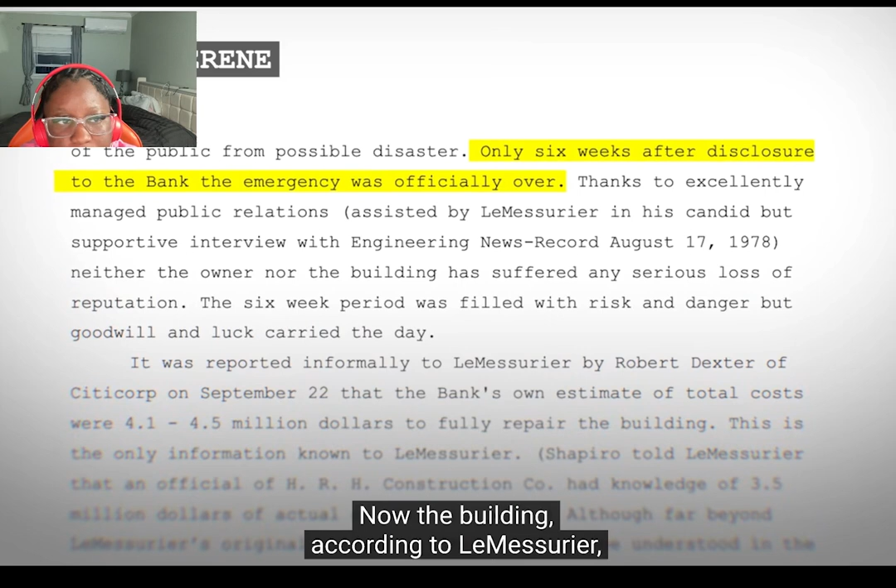Just 6 weeks after LeMessurier told Citicorp, the building, according to LeMessurier, can withstand a 1 in 1,000 storm. The repairs cost between $4 and $5 million, but LeMessurier argued that Citicorp approved an earlier building design that cost $5 to $6 million more, so they were willing to spend that much on the skyscraper anyway.

For almost 2 decades, the secret was confined to a small inner circle. But in 1995, the New Yorker finally brought Project Serene into the light. Far from being vilified, LeMessurier was praised for owning up to his mistake and fixing the issue as soon as possible.

After the article, New York updated the building code to require quartering wind calculations, and since that first damper in Citicorp, TMDs have spread across the globe, allowing architects to push skyscrapers taller and slimmer. It's the first tall building in the world ever built with mechanical help to make the structure work.

That's remarkable. Incidentally, that has been now copied 100 times in Japan. This is ubiquitous, and when I go to Japan, I'm treated like a tin god because I'm the father of the tuned mass damper. I said, really?

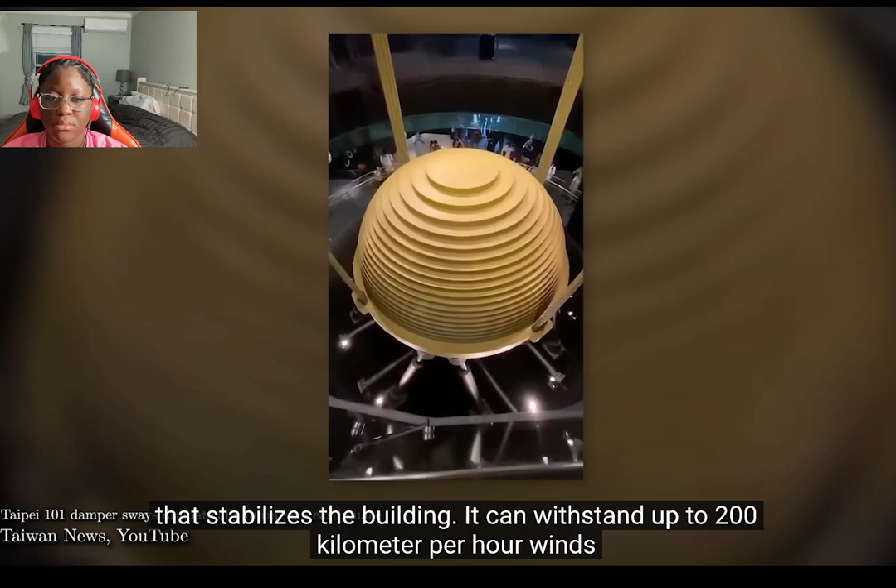Of the 20 tallest buildings in the world, 6 include a tuned mass damper, and they're especially critical in typhoon or earthquake-prone regions. For example, Taipei 101 has a massive 660-ton pendulum that stabilizes the building. It can withstand up to 200 km/h winds and earthquakes with magnitudes over 6.8.

But the legacy of this building is still steeped in controversy. First, who was the mysterious student that started it all? I think it was spring of 1978. There's a student at Princeton, an undergraduate student by the name of Diane Hartley, and she's studying structural engineering.

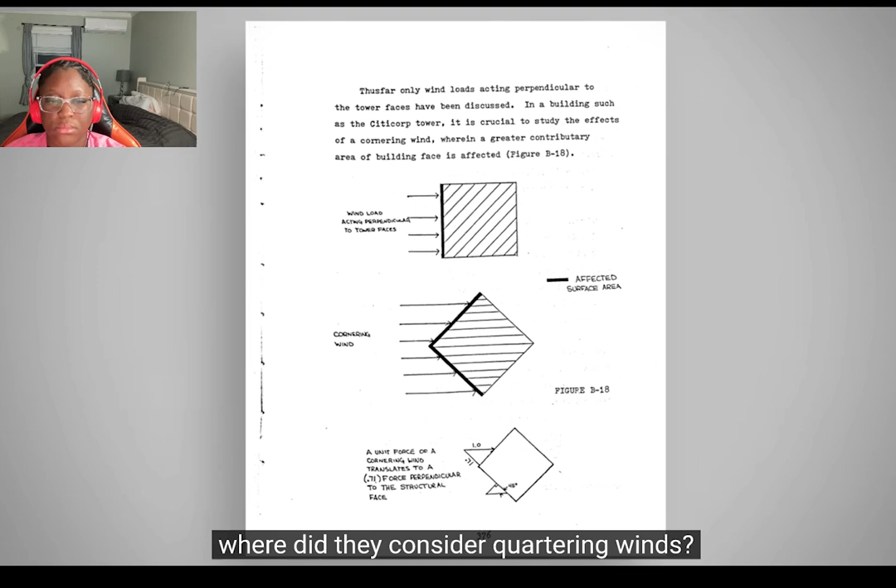It was time for her to consider a senior thesis, and they decided that a study of the new Citicorp Tower would be wonderful. It's a remarkable thesis. It contains a lot of the original engineering calculations by the engineers. She's looking through the documentation, asking where did they consider quartering winds? And she's not seeing it.

I must be wrong, she says. She's just an undergraduate student, and you guys are award-winning structural engineers. The engineer explains to Diane Hartley, quartering winds are not a factor in this building. So she's satisfied. She graduates, that's it. Doesn't think about it again.

But a year after the New Yorker article, the BBC released a documentary on the crisis. She was holding her baby, and she turned on the television, and lo and behold, she heard them reference a conversation with a student, an engineering student from New Jersey, reaching out to LeMessurier. And she said, I almost dropped my baby.

She just assumed for years afterwards that it wasn't her, because she didn't speak to LeMessurier. But in 2003, her thesis advisor told Diane that he checked all the other New Jersey engineering and architecture programs, and no one else was working on a project about Citicorp in 1978. She was the only one. She never spoke to LeMessurier personally, and she never claimed to speak to LeMessurier personally. The assumption was that either LeMessurier was mistaken and it was Diane Hartley who made the call, it was a female, or more likely that LeMessurier was tipped off by his New York engineers.

Then, in 2011, a man named Lee DeCarolis came forward. The phone call, as we understand it, came from a student at the New Jersey Institute of Technology. His name is Lee DeCarolis. He's not asking for money, he's not asking for fame or glory. He's just saying, this is interesting, and I'm the guy who made this call. He said, yeah, I had a conversation with Bill LeMessurier, and it pretty much lined up with what LeMessurier himself said. Sadly, LeMessurier passed away in 2007 before he could confirm the student's identity.

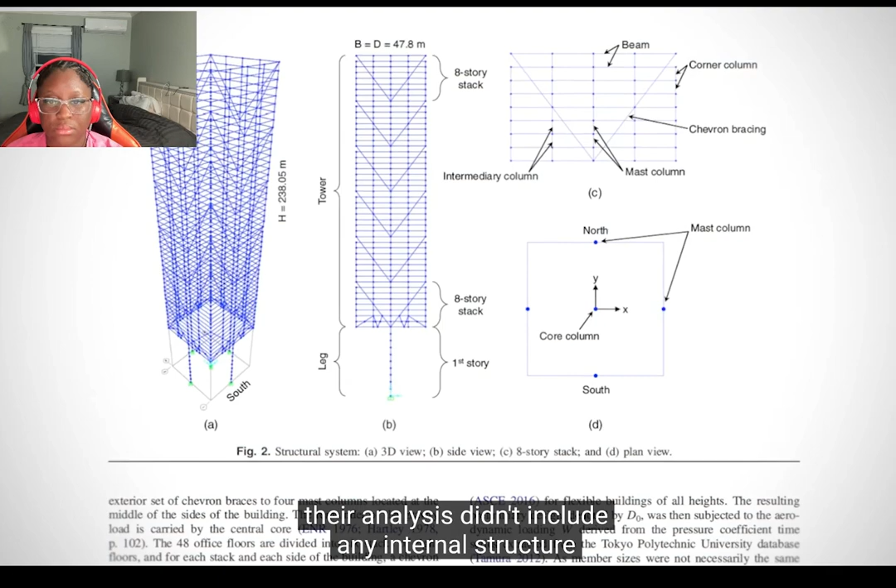As for LeMessurier, the engineering field still regards his actions as upstanding, and the Citicorp case is taught all over the world as a case of good engineering ethics. In fact, in my own engineering ethics course, I learned about the Citicorp building.

Every structural engineer experiences this, when you actually feel the weight of the responsibility, saying based on my engineering, that building is going to stand up. Nobody else worries about it. If you think about the emotional pressure that Bill LeMessurier was under, and then needing to come back and do something about it, and to mobilize, and to hold that during this entire process, it's truly a remarkable story. It really is. I'm gonna give it to him, for real.

And I think I want to end it off there. I don't want it to be negative, because I honestly really did like this piece. I like this film that I'm watching, and yeah, I don't want any negativity, because he stood up and he took care of his business. You get what I'm saying? He did what he's supposed to do. So that's cool of him.